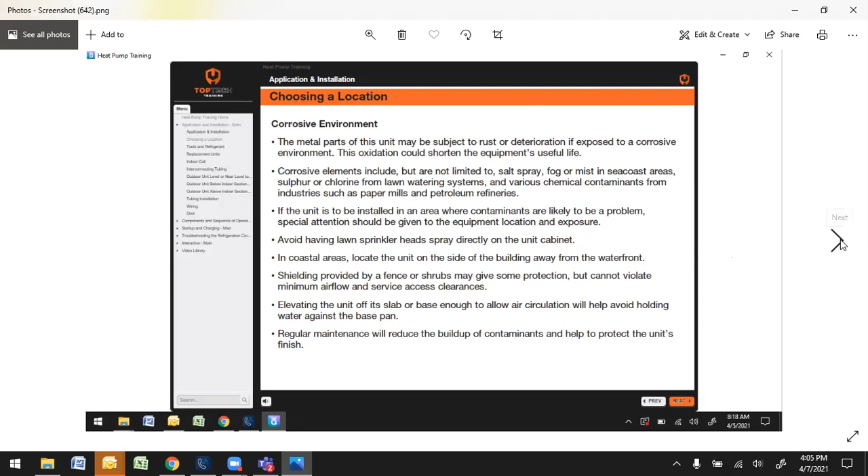So on the coast, that's something to worry about. Shielding provided by a fence or shrubs will give some protection, but you don't want to violate the minimum airflow or service access clearances. Some of that you have little control over—homeowners will put up fences or bushes. But if you can, let them know ahead of time: if they do block it off, it will have an effect on their system and its operation.

If you have a unit with space limitations, whether single or multiple unit applications—for a single unit, clearances below 6 inches will reduce unit capacity and efficiency. Do not reduce the 60 inches on the discharge, and from a service and installation aspect, keep a minimum of 24 inches. If you have multiple units, which is not uncommon with houses and buildings, when multiple condenser coils are aligned, a 6-inch clearance is recommended for 1.5 and 2-ton models, and a 9-inch clearance for 2.5 to 5-ton models. Combined clearances below the minimum will reduce capacity and efficiency.

Noise considerations—bear in mind this is a heat pump, so it does go through a defrost cycle. The Rheems have a kind of quiet shift compared to some other brands; it will stop and allow the compressor to relax, but there is still some noise associated with defrost. So try to keep the unit away from living, sleeping, or recreational areas. And to prevent noise transmission, the mounting pad for the outdoor unit should not be connected to the structure.

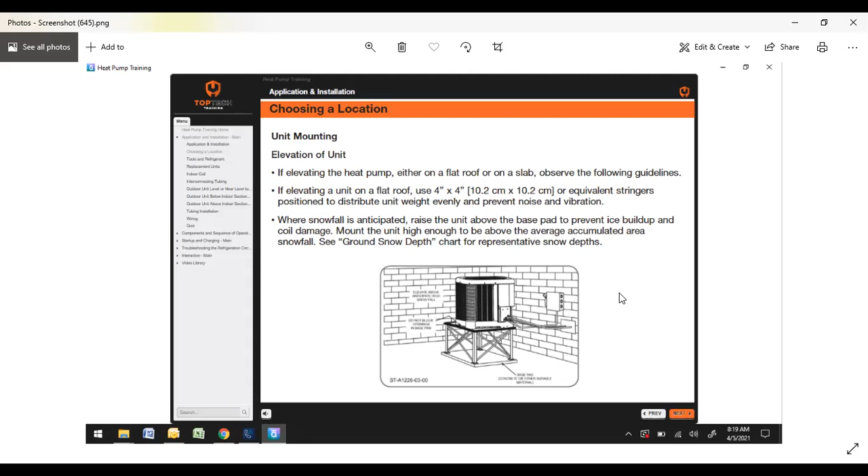So sometimes if you put them on the ground, they won't really be a problem. Other times I've seen them grow a whole ice fall up the side of the unit. So it just depends. But if you do raise it up, it's recommended - some guys use 3-inch pump ups, 6-inch pump ups, to get them up off the pad.

Some of the tools required for servicing 410A models. Years ago, when R22 was predominant and 410A was just starting out, everybody had to have 2 sets of gauges, which most people still do.

A lot of the gauge sets do multiple refrigerants now if you're dealing with different refrigerants. But you do have to have a manifold rated up to 800 PSIG on the high side, up to 250 PSIG on the low side, a 550 PSI low side retard, and manifold hoses with a service pressure rating of 800 PSIG.

That is important when you're dealing with high pressure refrigerant. If you have old worn out hoses or underrated hoses, they could explode. If you've ever had one explode, it's like a gunshot going off right next to your head. So it is important to check your hoses, check your seals, make sure that they're properly rated.

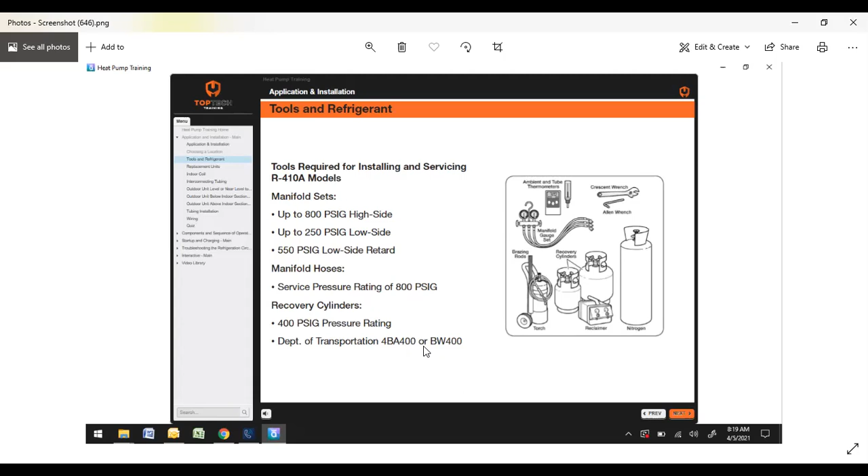Also make sure you have recovery cylinders of at least 400 PSIG and DOT ratings of a 4BA400 or a BW 400.

When you're dealing with direct replacement units, to prevent failure of a new unit, the existing line set must be correctly sized and cleaned or replaced. Care must be exercised that the expansion valve device is not plugged.

For new and replacement units, a liquid line dryer must be installed - it is supplied with each unit - and refrigerant tubing must be properly sized.

Recommend testing the old system for any kind of acid. If it is positive, a suction line dryer should be installed and removed after about 72 hours.

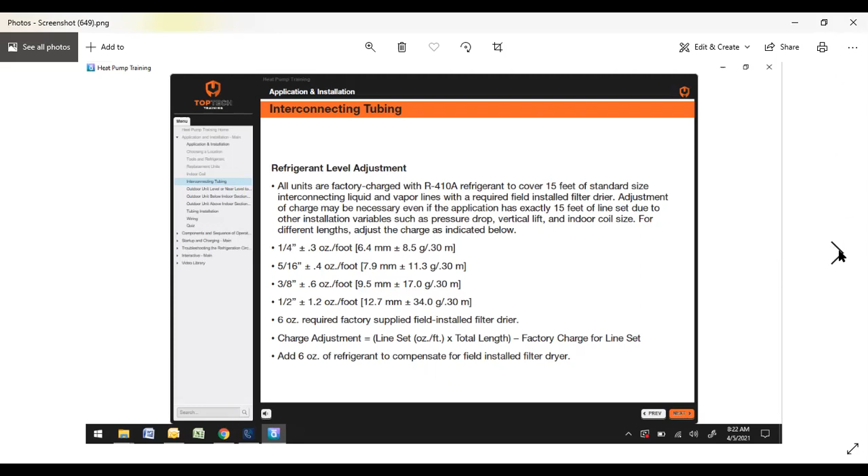And there again, a lot of this is just if you're going to do a gross charge. You don't want to take your gross charge, or the fact that it's 15 feet, as being okay. If it's a downflow situation, you may very well be overcharged at 15 feet out of the box. There again, it could be an upflow at 15 feet and you're still short. So this just gets you definitely within the ballpark, but it's not fine-tuned from there.

This goes over some of your interconnecting tubing and fitting losses, similar to your PVC elbows on 90% furnaces, giving you the different equivalent lengths. So like a 3/8, let's do 3/4 here - a 3/4, 90 degree, short elbow adds 1.9 feet to your equivalent length. If you do a long radius, it's 1.3. So by the time you start adding all your fittings in, along with your additional length, that gives you your total equivalent length.

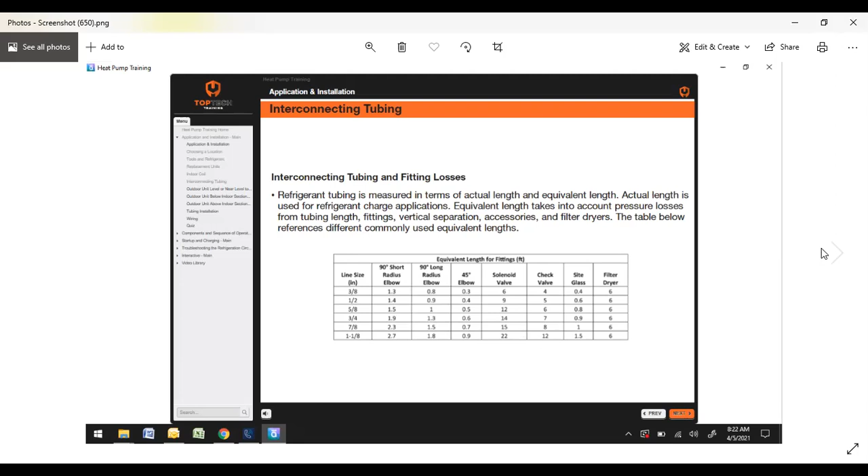Liquid line selection: the purpose of the liquid line is to transport warm, subcooled liquid refrigerant from the outdoor unit to the indoor unit. It is important not to allow the refrigerant to flash into superheated vapor prior to the expansion device. The flashing can occur for a couple of reasons: low refrigerant charge, improperly selected line size, absorption of heat prior to the expansion device, excessive vertical rise between the condenser and the evaporator. Also, if you have kinks in your liquid line, that can cause it to flash prematurely.

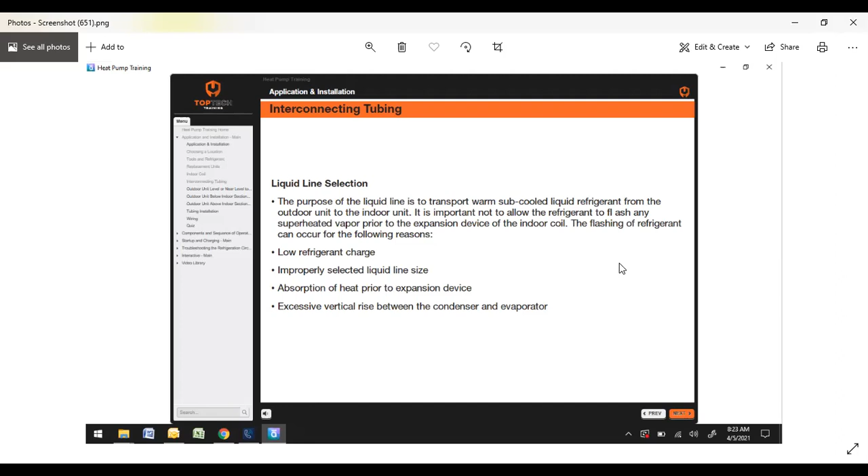Your suction line's purpose is to return the superheated vapor to the condensing unit from the evaporator. Proper suction line sizing is important because it plays an important role in returning oil to the compressor to prevent potential damage to the bearings, valves, and scroll sets. Also, an improperly sized suction line can dramatically reduce capacity and performance of the system. So there's lots of systems that are working and cooling, but they're not nearly as efficient as they should be, and that's not uncommon.

You can put the best, most efficient system in, but if you don't follow the proper guidelines for proper line set selection, you could have a 17 SEER system realistically, if you're lucky, getting 13 SEER.

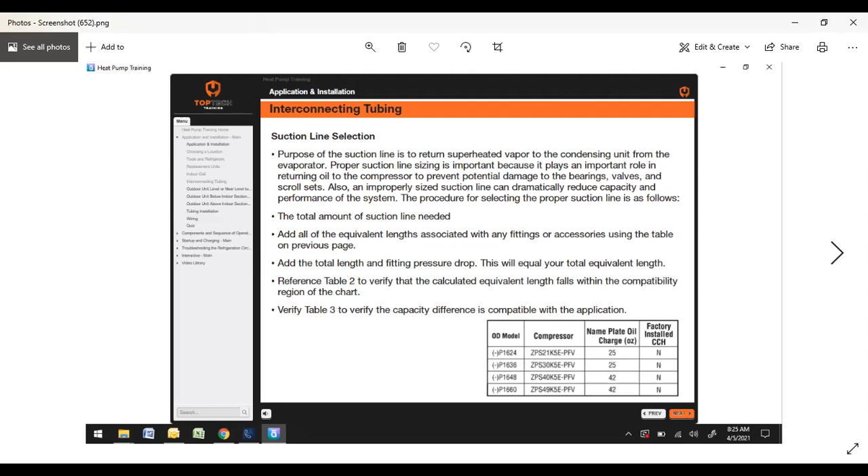And this is a big one too - long line set applications can require a considerable amount more refrigerant. The additional refrigerant needs to be managed through the entire ambient operating envelope that the system will go through during its entire life. Off-cycle migration is where the excess refrigerant condenses and migrates to the lowest part of the system. Excessive buildup of refrigerant at the compressor will result in poor reliability and noisy operation. So if you have a very long line or a very high lift, and it doesn't come with a crankcase heater installed, it'd be a good idea to keep a crankcase heater on it. That will keep the refrigerant boiled off in your compressor, which will make it easier for starting and prolonged operation.

Tubing installation: observe the following when installing correctly sized L-type refrigerant tubing. Check the tables for the correct line size. If at all possible, use the units as they come with specific lines already on them. If you stick to what's there, you're generally safe in most applications. So if you're putting a new line set in, you can check and see - do I have 3/4, 3/8, 3/4, 3/8, 7/8? If you match it up accordingly, that will keep the system running good for you.

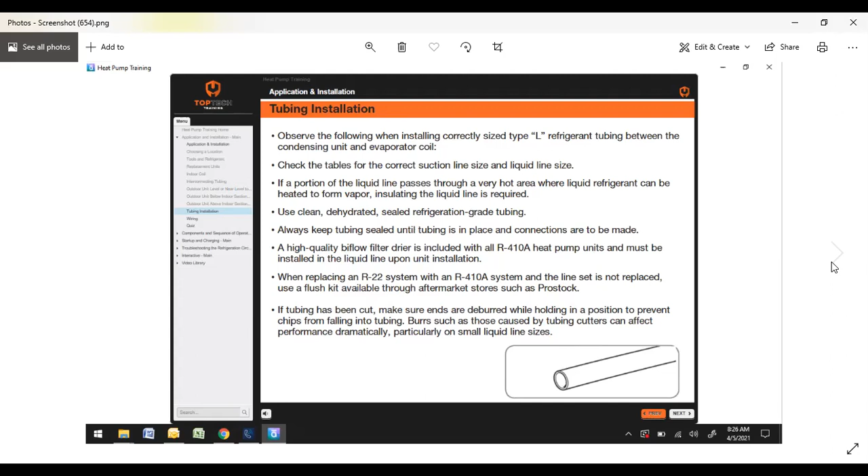For best operation, I came across this a long time ago: keep tubing as short as possible with a minimum number of elbows or bends. A lot of guys use a tubing cutter or tubing bender. Some people are really skilled at it and make it look perfectly mechanical. If you can use a bender and make it look nice and mechanical, that's even better. Each mechanical fitting you have to put in is one more joint with the possibility of leaking.

So if you can use a bender, outstanding. If the tubing is to be run underground, it must be run in a sealed watertight chase, such as PVC, something somewhat watertight. Use care in routing tubing, do not kink or twist. That's where a good tubing bender helps on the vapor line to prevent kinking. Bending 3/8 or anything below that's pretty easy. 5/8 is okay if you're good at it. 3/4 or 7/8, I'll always kink it no matter how hard I try. So use a tubing bender if you have one, just to prevent kinks.

Now here's a big one. Whenever you're mounting your lines, route the temporary hangers, straighten the tubing, install your permanent hangers. Lines must be adequately supported. If the vapor line comes in contact with walls, ceilings, or flooring, the vibration of the vapor line in heating mode will result in noise inside the structure.

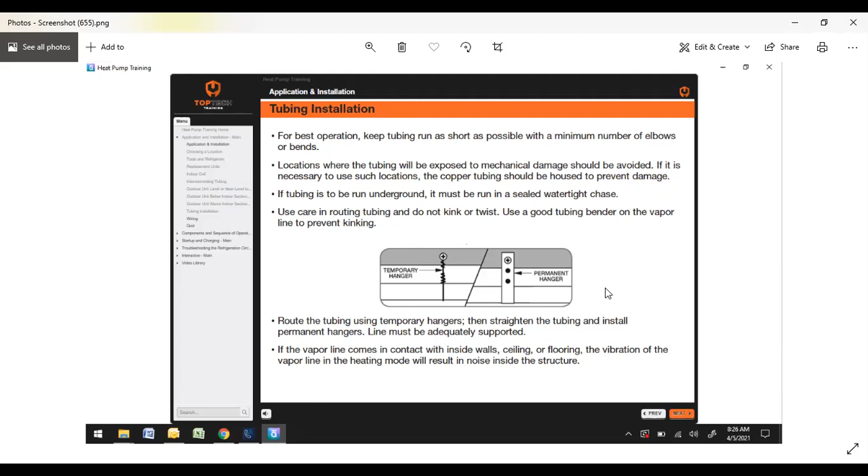I came across one time where they ran the refrigerant lines under the house. It had vibrated for so long against the water line that it actually fused itself to the water line. So whenever they turned the water on in the house, the same water would actually run through the outdoor unit and the evaporator coil. It did create a leak, obviously, but it also fused into the water line. So in that case, because they didn't take the proper steps to make sure everything was supported properly and not touching and kinking, it basically destroyed the system.

Make sure you blow out the liquid and vapor lines with dry nitrogen before connecting to the outdoor unit and coil. Any debris in the line will end up plugging the expansion device. TXVs tend to have enough problems on their own; we don't need to create more problems with additional debris that will get in there and end up plugging it up.

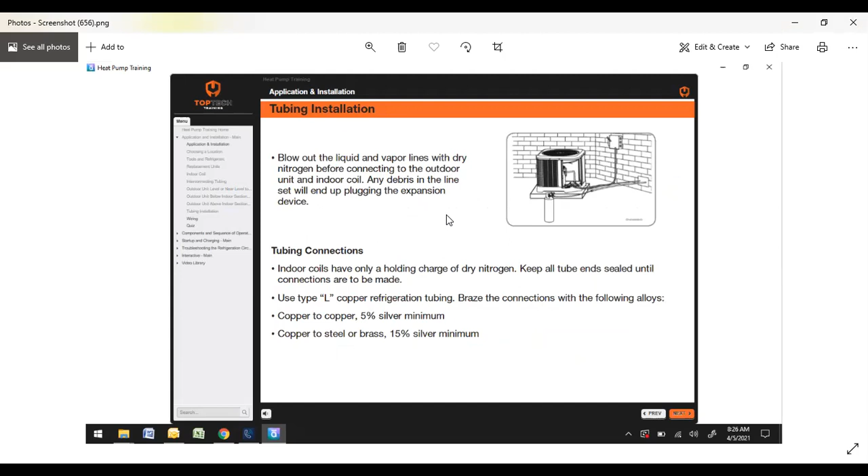Now there's different ways that you can attach to the line. Some guys use Pro Press. They even have shark bite fittings now that you can shark bite your refrigerant lines. I haven't used any yet. Most people braze them, so it is imperative that you purge with nitrogen as you're brazing, because as you're brazing, all that black scale, gray and black burnt carbon you see on the outside is also what you get on the inside, unless you purge with nitrogen.

Be sure both valves are shut off, then remove your service caps and cores to protect the seals. Once you've done that, be sure to wrap the valves. I'd do both: wrap the valves with a wet rag and also use a thermal barrier, whatever kind you like, the paste or the gel. The more you can protect these valves, the better.

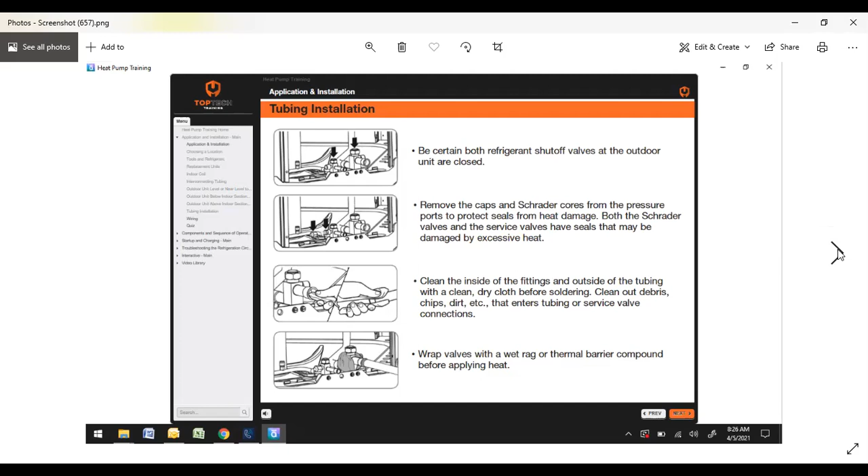If you overheat them, if you don't take the right precautions, they will leak. I've seen that a few times last summer. So take the extra 30 seconds, whatever it takes, to protect your valves. Five minutes spent on the installation could save you hours on callbacks.

Braze the tubing between the outdoor unit and the indoor coil. Flow dry nitrogen into the pressure port. After your brazing, use an appropriate heat sink to cool the joint, then reinstall your Schrader core into both pressure ports. Do not allow your vapor line and liquid line to be in contact with each other. That can cause undesirable heat transfer, resulting in capacity loss and increased power consumption.

Because all the new units we're selling today, everything's being sold on efficiency, let's face it. So if you're going to sell on efficiency, do everything you can to give them what they're paying for. Customers don't know any better, but if you do a really poor job and their new 16 SEER doesn't save them any more money than their old 12 SEER did, they're not going to see any benefit.

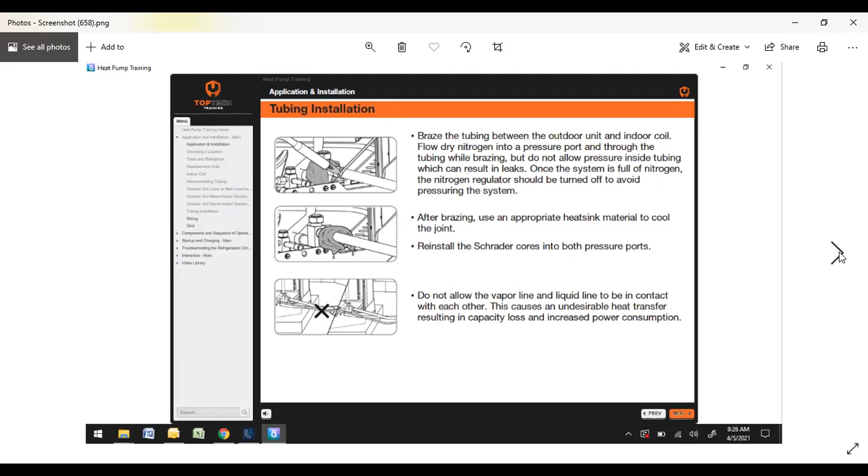Leak testing - this is huge. I still see guys braze their joints in, put a vacuum pump on it, and don't even bother to leak test it. The indoor coils do have a holding charge of dry nitrogen, so once you pop those out, you should get a small puff of nitrogen.

This is pressurized through the line set and coil through the service fittings. They're set at 150 psig maximum. I personally always test it higher than that if I'm just testing my line set and coil. Once you're pressure testing your compressor as well, you do want to keep that about 150. Pressure test that, let it sit for at least 15 minutes, and make sure it hasn't dropped. If it has dropped, use some soap bubbles to figure out where your leak is.

Then we'll get into the control wiring, low voltage wiring. It's 24 volt, needs a 40 VA minimum transformer. Most furnaces, circuits, and air handlers will be sufficient for that. Use 24 volt, 18 gauge wire. Don't use speaker wire or that really thin thermostat wire - it just doesn't work, it creates more trouble than it's worth.

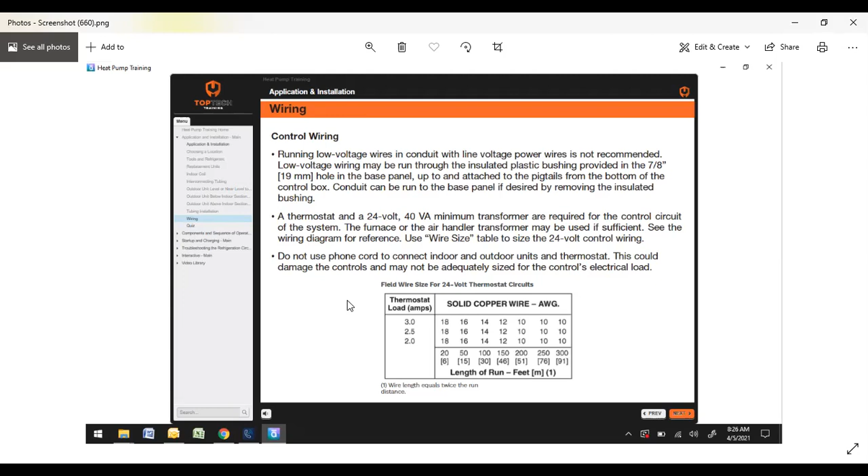Always run extra wires. If you're running an air conditioner, I ran at least a 4-wire if I needed a 2-wire, and I always ran an 8 if I needed a 4. That way down the road, if you need to switch a wire or two, wire is not horribly expensive. That could save you a lot of money down the road as well.

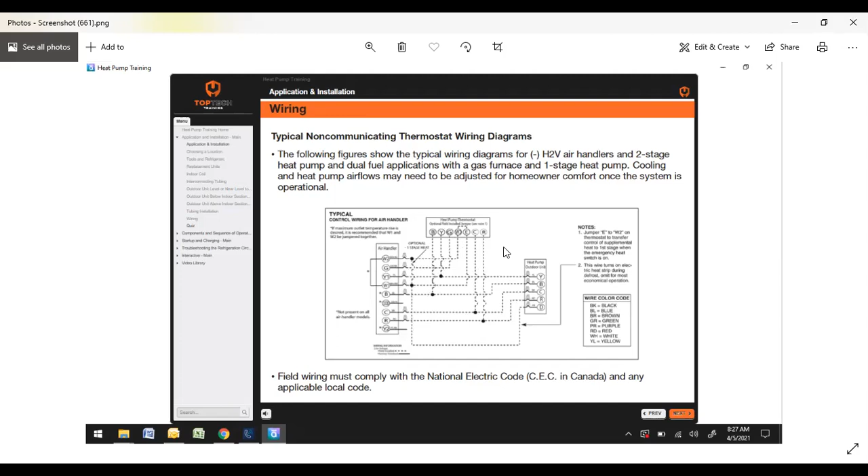Now the 14 SEER, 15 and 16 SEER 2-stage, all these are non-communicating units. They can be used with communicating furnaces with the EcoNet thermostat. So you have that option as well, but typically you're going to use either a single-stage heat pump stat with auxiliary heat, or 2-stage if you're doing a 2-stage heat pump, 2-stage air handler.

Your power wiring - it is important that proper electrical power from the commercial utility is available at the unit. Voltage ranges from a minimum of 187 to a max of 253. If you're down at 187 or even 190, your compressor's probably not going to start. And if you're up over 253, you're probably going to end up having compressor and fan motor damage. So you've got single phase 208-230, three phase 208-230, 460, and 575.

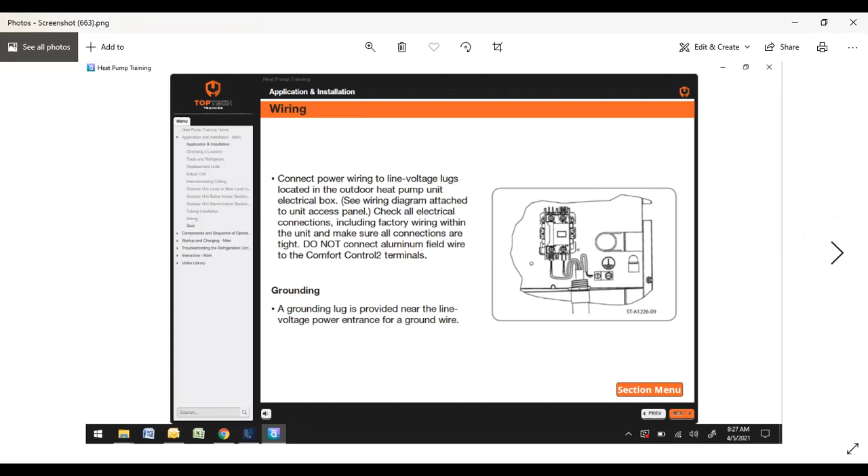Now, as you're looking at the units, this is a model number explanation or nomenclature. Your first letter, in this case Rheem, will be an R. Your second letter is going to be a P for heat pump. Your third, which will be 2 digits, is your SEER, so we're dealing with 14, 15, or 16 SEER. The next 2 digits are your tonnage, so we've got 18 through 60.

The next letter will be basically your design version. In this case, A, B, or F. We typically stock the F because we get better ratings out of the AHRI matches with the F model.

The next letter is going to be your voltage. Your J is the most common, that's single phase 208-230. We do have them in C voltage, 3 phase 208-230, and D, which is 3 phase 460.

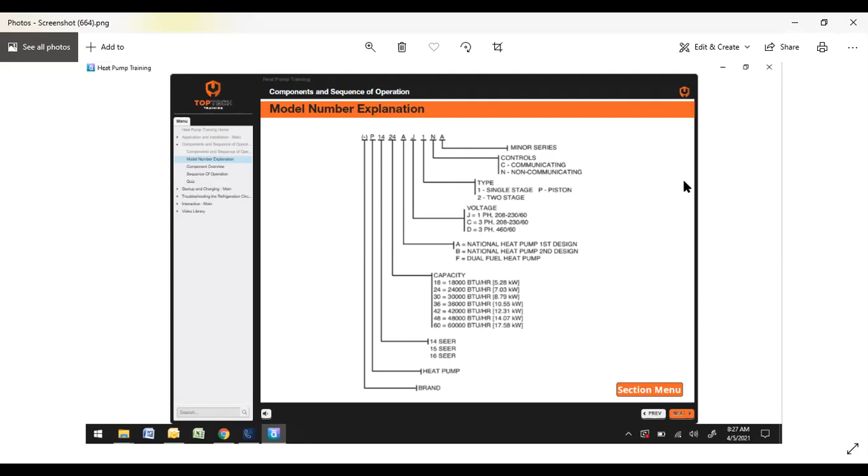Your next number, in this case 1, will be single stage. If you have a 2, it's going to be 2-stage. Your next letter is going to be an N, and these particular units are non-communicating. So you have the N, and then the A is your minor series. As they make revisions and improvements, that could go to a B, C, D, whatever minor series changes are made.

Component overview here. This is a picture of the 14 SEER heat pumps.

Downward view here, fan blade, and things I like about the Rheem. You can access these coils real simply with 1 or 3 screws, depending on the tonnage. They're all single row coils, easy to clean. There should be no reason these coils do not get cleaned and cleaned properly and thoroughly, because they're single row, you can see right through them. Down here, you've got easy access to your service valves, and you've got 2 nice little cups here on each side to put your service valve caps and the Schrader cores and such.

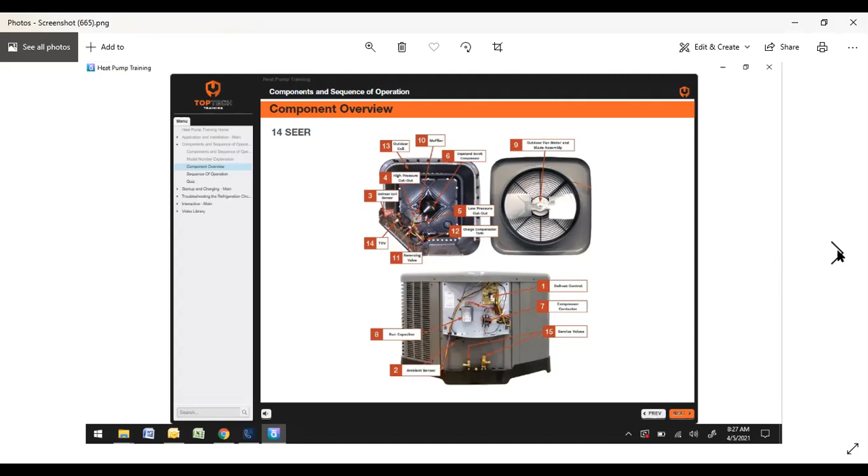To 16 SEER 2-stage unit, predominantly the same unit. We utilize the same defrost board. Compressor obviously is 2-stage.

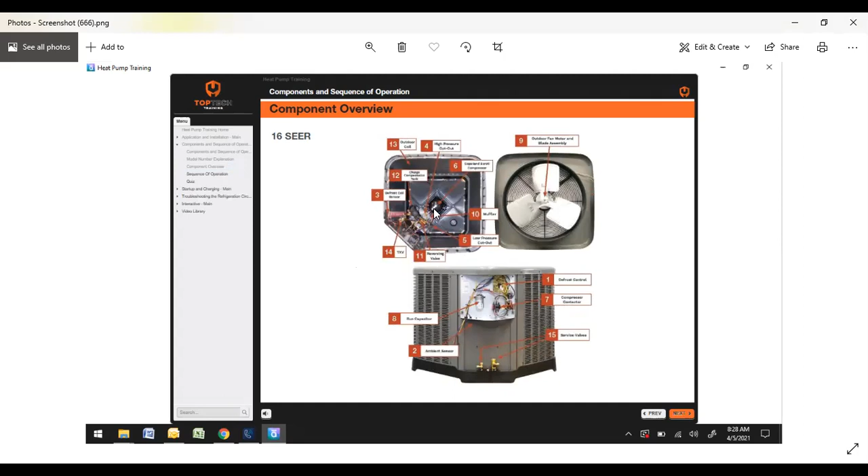You have your C, which obviously is your common, your R, which is your 24-volt hot, your Y, which is your compressor contactor, first stage of cooling, or first stage of heat.

You have your B terminal. So when you think B, in some brands B can be common, but with Rheem, think of O and B. Every thermostat you set up, you've got to say, is it an O or a B? B is your reversing valve, so it's going to engage in heating, which is opposite of the O. So your B is going to be your heat, and then your D will be your auxiliary heat.

So once you go into defrost, you're going to immediately get a signal in your D wire, which is going to turn on your auxiliary heat.

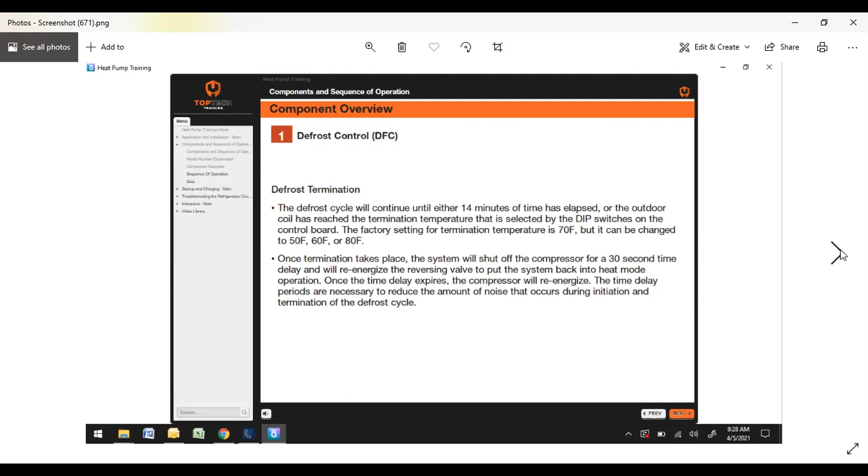Your test pins - so your test mode pins have three very useful functions. Nobody likes to wait time delays. It's a pain to wait 5 minutes. So if you're in a time delay on the outdoor unit, all you got to do is short your test pins out, and it will immediately kick in your unit. That works for both heating and cooling, so there's no sense in waiting the 5 minutes out.

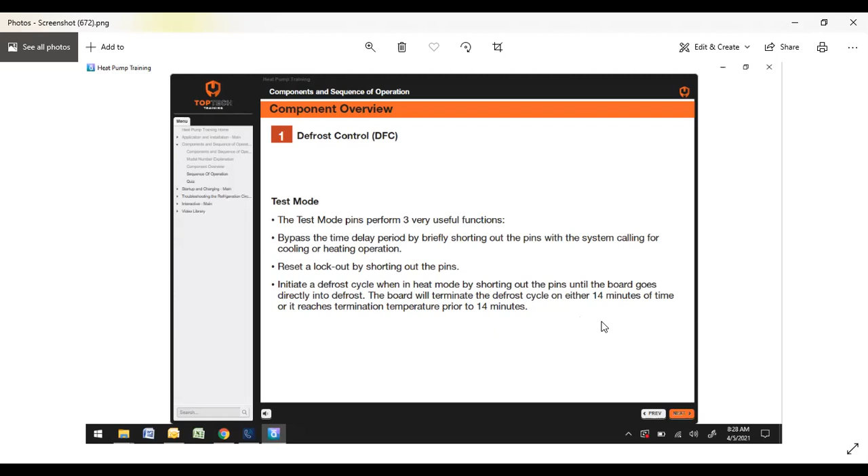If you come up on a unit that's been locked out due to high pressure or low pressure, the only way to reset that lockout is to break your 24 volts to the outdoor unit, or you can short the test pins and that'll reset your lockout. You can also initiate a defrost anytime it's in heat mode. So like I say, that can be a quick 30-second defrost, or it can be whatever it needs to be.

Let's see here, okay, now we get into the defrost sensors. The defrost sensors - they're both 10K ohm resistors. One sensing your outdoor ambient, the other one sensing your coil temperature.

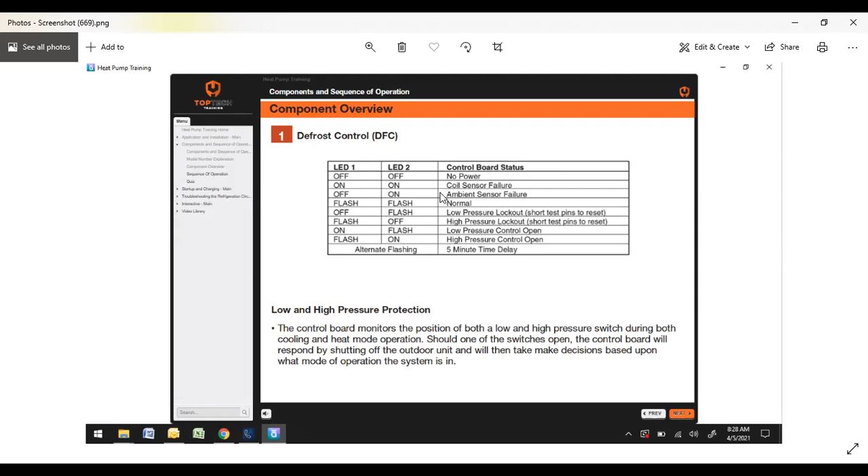We had some issues not too long ago with some sensors where they weren't reading correctly for whatever reason. If an ambient sensor fails completely, it's supposed to initiate a defrost every 34 minutes. But if you lost a coil sensor completely and it recognizes that, it will give you a code. If you lose an ambient sensor failure completely, it'll give you a code.

It may not be a complete failure, it just may not be sensing the correct resistance. So if your sensors are out of calibration, the system will not perform a proper defrost or may not enter a defrost. These are negative coefficient 10K ohm resistors.

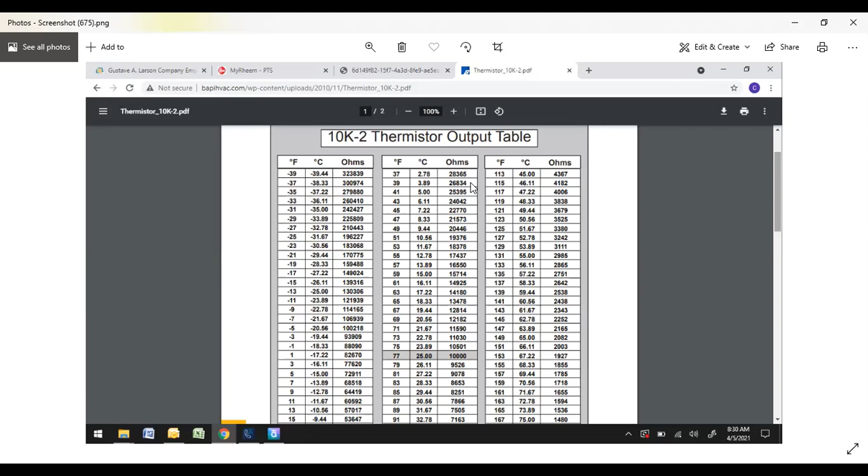If both sensors are calibrated properly, your sensors are fine.

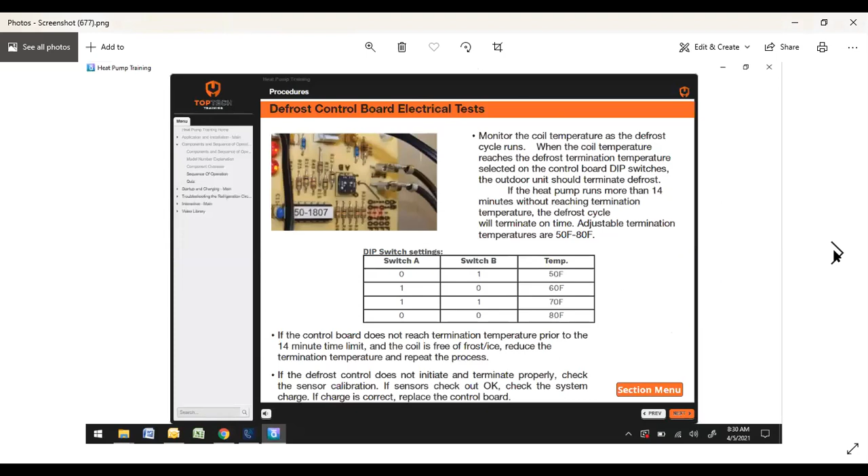Your ambient sensor is actually mounted just below your electrical panel right here. Right here is their little chart. So we'll say 32 degrees on this one, we should have had 32,650. That's what we're looking for if you're doing an ice water test.

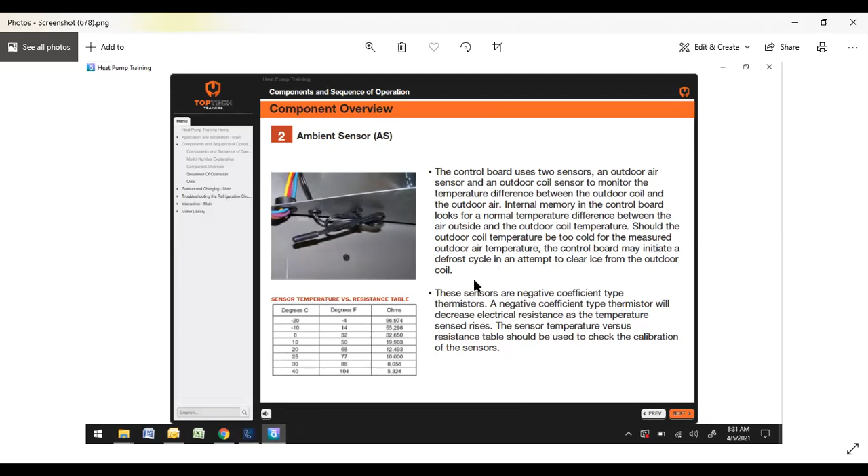The defrost coil sensor is really hidden. You won't typically see the wiring because of the way it's secured so the fan doesn't hit it. But if you're looking at the electrical compartment, or if you take the top off the unit, it'll be to your left side at the very top of this coil right here. This line here is too small for the bracket, this line here is too small, this line here would work, but they want you to put that at the very top bracket right here.

The voltage output from the control board to the sensors is 4.5 to 5 volts DC. So if you have a completely failed or shorted sensor, it would recognize that, but it cannot recognize if the sensor is not calibrated properly. That's where sometimes you have to calibrate it or make sure that they are calibrated.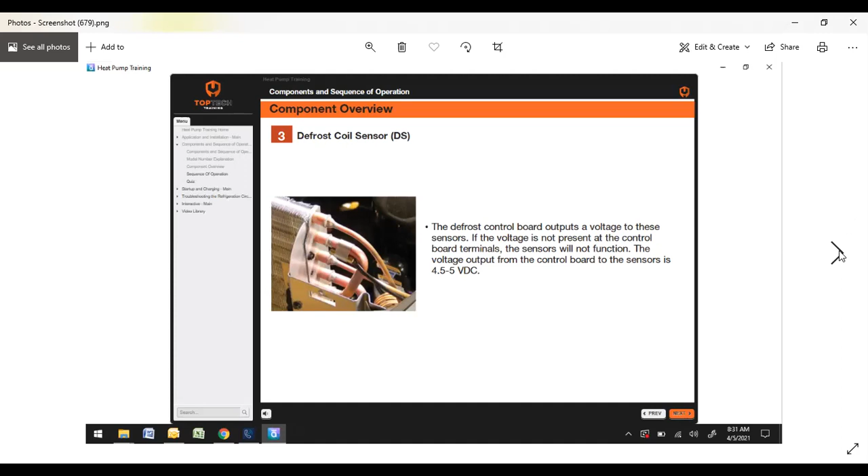These also have high pressure cutouts. It's an auto reset that opens at 610 psig, and closes at approximately 420 psig. So if you're hitting 610 pounds, obviously there's a restriction somewhere. If this control opens 3 times within a call for heating or cooling, then you will get a lockout, and it will remain locked out until either the 24 volts to the unit is disrupted, or until you hit the test pins.

Some common causes of high pressure switch lockout include overcharged systems, inoperable fan motor, dirty outdoor coil. It's not uncommon, for instance, if you put a downflow system in - because we'll get into the charging charts, they are different on heat pumps between upflow and downflow - if you put a downflow heat pump in and it's 10 feet from the outdoor unit to the air handler, there's a real good chance it's going to be overcharged out of the gate. So if you actually start the unit and watch it, you'll see your head pressure start to climb.

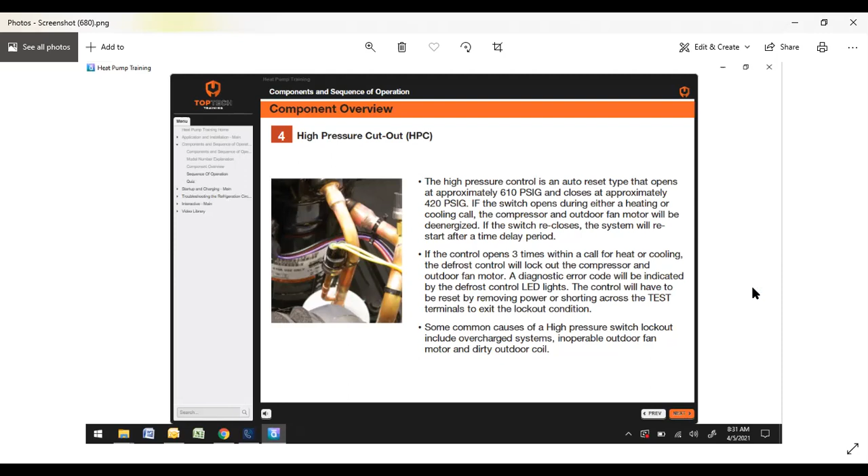Get your low pressure cutout. Your low pressure is an auto reset as well. It opens up at 15 psig and recloses at 40.

The control board will respond differently depending on whether it's heating or cooling. Cooling mode: if the switch opens during cooling, the outdoor unit will stop - compressor and the outdoor fan motor. If the control resets, the system will restart after a long time delay period. There again, if you get the same 3 trips in a call for cooling, it's going to lock it out.

In heating mode, if the low pressure control opens during a call for heating, the outdoor unit compressor and fan motor shuts off, and when the switch resets, the system will enter a time delay and then restart. There again, it will also lock out after 3 times, which will be real evident in heating season - both cooling and heating. In heating season, if it locks out during a period of time, their electric bill is going to go up substantially.

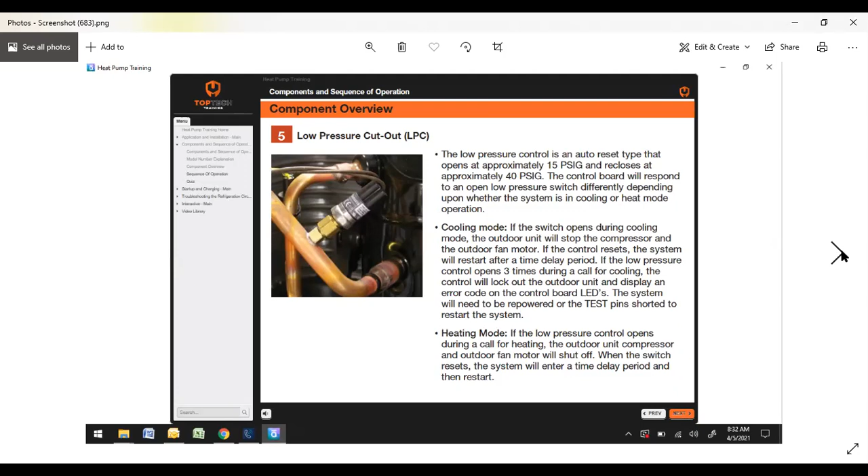The Copeland ZP compressors, scroll compressors that are in all these units, are designed to deliver a 2 to 4% increase of efficiency over the prior generations. There are 3 single and 3-phase configurations. You have 3 windings: your run, which is your red, your start, which is your purple,

and your common, which is your black. Your orange wire connects the run wiring to the common terminal and capacitor. If you cross these up, if you're replacing a new compressor, or somebody's been messing with it, or if it's not wired right from the factory, hypothetically, you will get what appears to be a lock rotor situation.

It'll try to start, it'll drop out. So if you ever come across that, put a new compressor in, first thing you want to do is double check everything, double check your wiring. Make sure your red's going to your run, your purple's going to your start, your black's going to your common. Make sure that's the way it is at the compressor, and also at the contactor. And then make sure your orange wire is connected to the appropriate terminal on the run capacitor. We get that quite a few times a year.

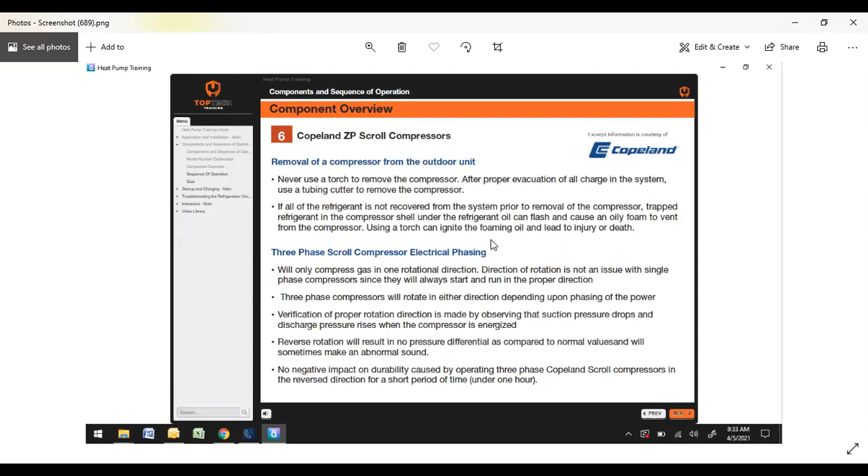Startup or replacement of a new or replacement compressor. When charging a system with a scroll compressor, charge liquid into the high side only. It's not a good practice to dump liquid from a refrigerant cylinder into the crankcase of a stationary compressor. If additional charge is required, charge liquid to the low side of the compressor when the compressor is operating.

Do not start a compressor while in a deep vacuum. Internal arcing could occur. And do not operate compressor without enough charge to maintain at least 55 psig. A little further here, do not operate with a restricted suction or liquid line. Do not operate with a low pressure cutout disabled. Allowing suction pressure to drop below 55 for more than a few seconds could, over time, overheat the scrolls and cause early drive bearing damage.

Your 16 SEER models use two-stage compressors. These compressors have an internal low voltage unloading solenoid that will control the hot gas bypass ports inside the scroll assembly. When operating in low stage, the bypass ports open to reduce the compressor capacity to approximately 67%.

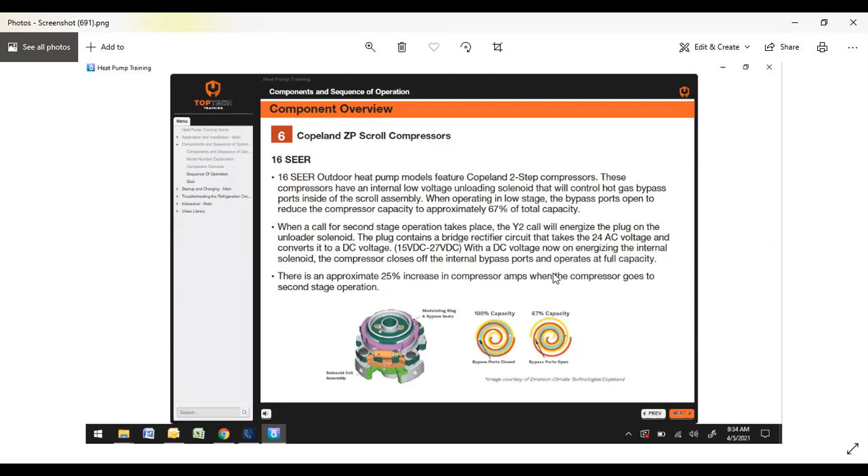There's an approximate 25% increase in compressor amps when the compressor goes to second stage. Usually you can hear it kick in. You should also see your pressures on your gauges change. Also your amp draw would change as well. That's important to understand.

Here's the nitrogen pressure testing safety limit. Suction line dumps the refrigerant suction gas directly into the shell of the compressor. The suction gas acts as a coolant for the compressor motor. The most pressure the compressor shell will be exposed to is the suction line pressure or the pressure during off-cycle equalization.

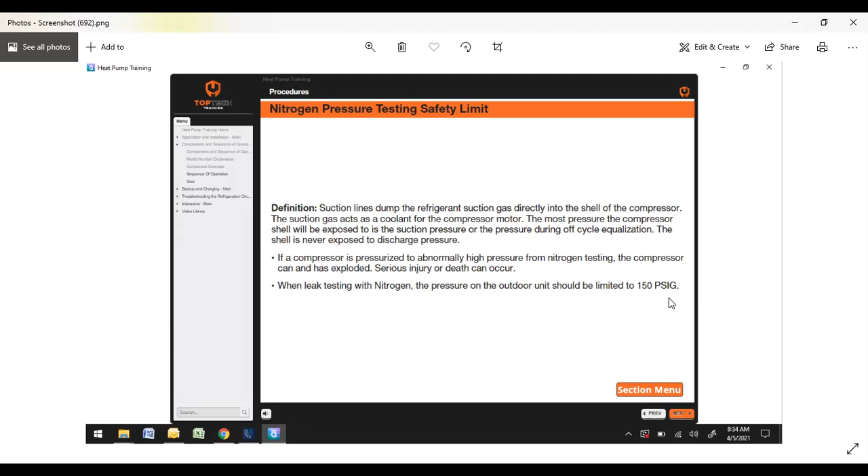If the compressor is pressurized to abnormally high pressure from nitrogen testing, the compressor can, apparently it's happened, has exploded. They can explode, and obviously serious injury or death could occur. So if you're taking your compressor into the equation, when leak testing with nitrogen, the pressure on the outdoor unit should be limited to 150 psig.

Some of the pumping problems here. There are many misunderstood facts regarding compressor pressures. High suction pressure and low condensing or head pressure, that will achieve peak performance. As the suction pressure drops and the condensing pressure, head pressure rises, your actual system capacity goes down.

Scroll compressors do not have valves. There is no valve test as with the reciprocating. When you first start a scroll compressor, the suction pressure should fall and the condensing or head pressure should rise. If this happens, you know the compressor is pumping.

If a compressor is operating with an excessive vibration, metallic sounding operation, or higher than normal amp draw, your compressor may have internal damage.

That's usually not very hard to hear. I'm sure most of you guys have heard a noisy scroll. If the scroll plate breaks, it will make a heck of a racket. So if you hear that, you don't let it run too long. Just turn it down and resolve the issue.

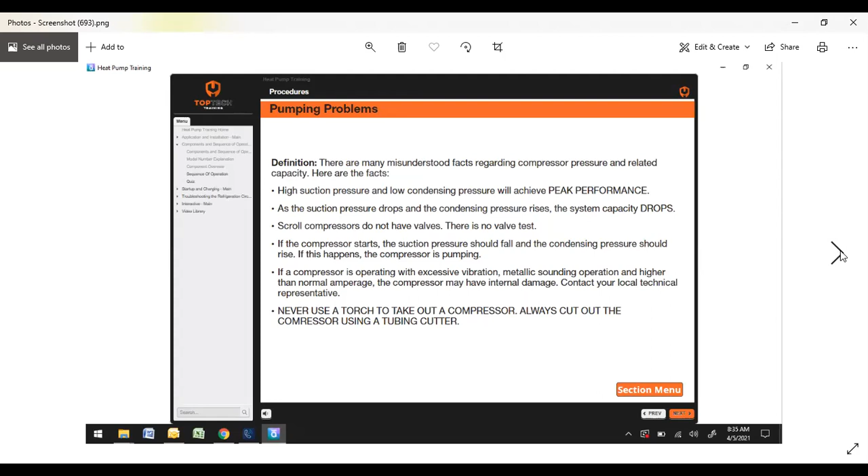A lot of the units will come with a crankcase heater already installed. Most installations will require the installation to prevent excessive liquid buildup or migration in the off-cycle periods. Generally speaking, starting kits are usually not needed because the scroll compressors always start unloaded, so even when the pressures are not balanced, they'll still start unloaded.

Those of you guys that have Meg-ohm testers, Megger testing of a scroll compressor can result in an invalid reading due to the position of your scroll compressor in the motor oil. They have those little, I won't say who, but there's a brand that makes them, it's got a little chart, good or bad, on your Meg-ohm reader. If you line up 10 brand new scrolls, I guarantee you at least 9 of them will show as being defective. So Meg-ohm testing of a scroll compressor doesn't give you a real good reading because of the position of the scroll compressor in the motor oil.

Center bearing wear at the bottom of the compressor can be excessive when liquid floodback or liquid flooding starting occurs. The bearing wear can lead to rotor drag on the windings and also to a direct short. So if you ever have an opportunity to see one cut open, you can see where the oil line should be and where, in a flooded compressor or a severely overcharged unit, you can see where the oil line is and you can see the damage that begins to occur.

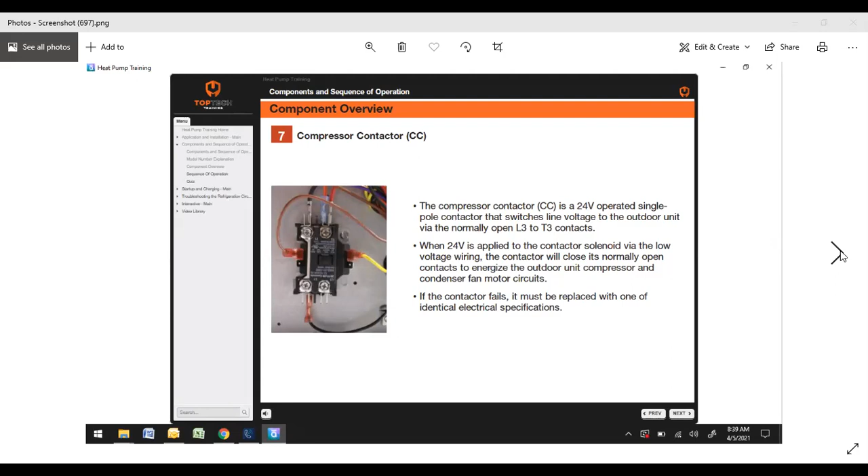You'll have your run capacitor. Your single speed models will feature dual run capacitors that serve the compressor and the outdoor fan motors. The 2-speed models will use an ECM outdoor fan motor. So the run capacitor in these models will be a single type dedicated just to the compressor circuit.

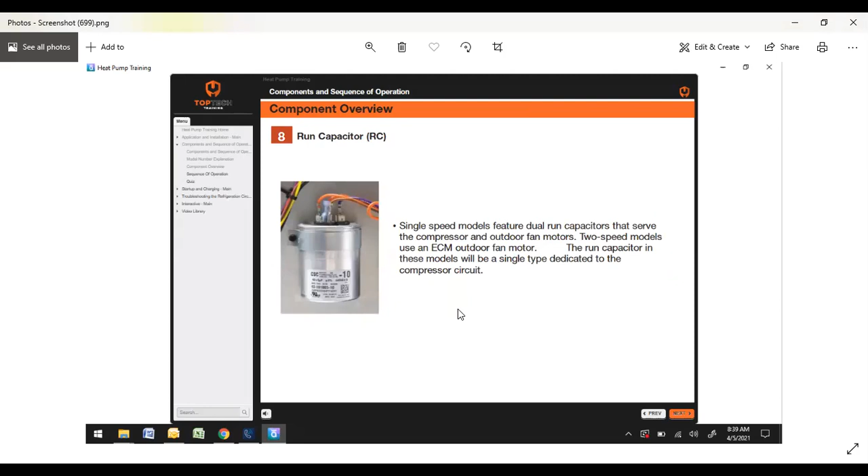You have your outdoor fan motor and fan blade assembly. The 14 SEER and 15 SEER are going to have a PSC outdoor fan motor, so that's 1 speed for both cooling and heating. The motor is connected to the dual run capacitor at the capacitor labeled fan.

The motor is energized by the defrost control board terminals labeled fan. So you'll have two fan terminals on your defrost board. One wire is always hot coming off your contactor, and then that is made or broken by the defrost cycle. So if it's in normal operation, that's going to be a hot terminal. If you go into defrost, it will disable that fan terminal.

And that's another good one too. Had a guy call the other day. His outdoor fan wouldn't come on, so he was checking. He thought it was a bad motor. We got to talking, walked him through it. Now he checked basically that he had 240 between the common and the hot fan terminal. When he switched over to the other fan terminal, he did not have 240, so therefore his motor was not being engaged. So ultimately, the motor was fine, and the defrost board was the faulty component.

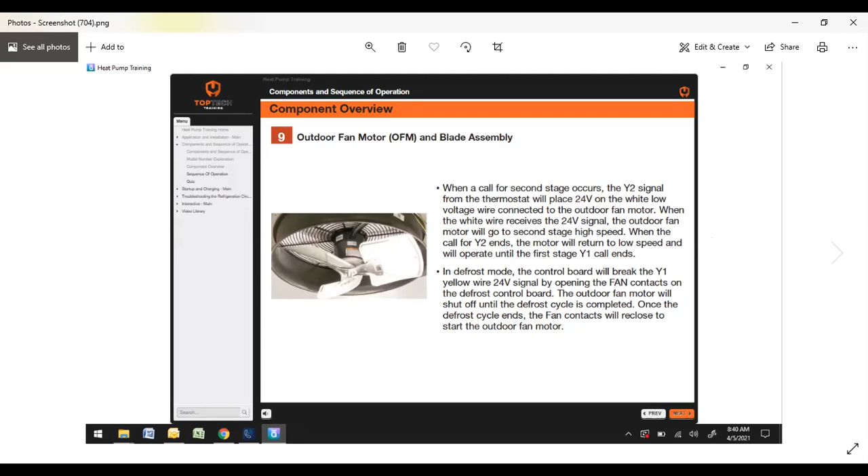And you'll also see what looks to be a filter dryer on the inside of these units. It's actually a muffler. Compressor mufflers are used to reduce both low and high frequency gas pulsations. The mufflers are mounted on the discharge line at the outlet of the compressor prior to the reversing valves. Mufflers should be changed or flushed if a compressor burnout has occurred.

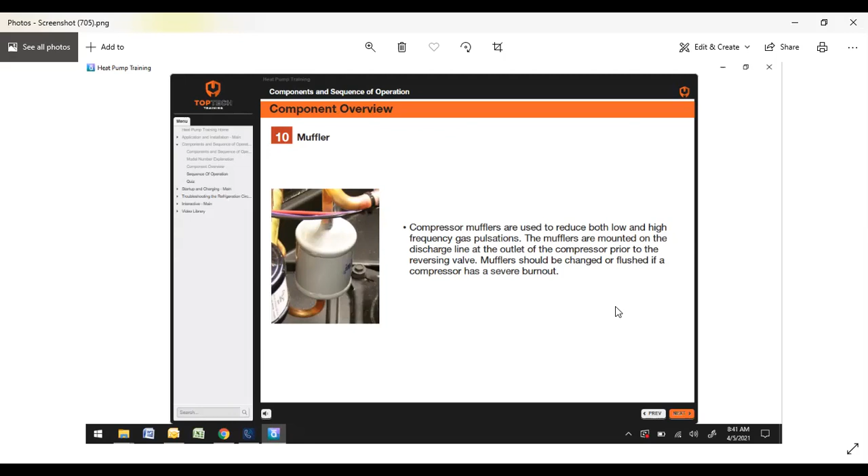If you ever look inside of a unit, you'll see all units are different, but you'll see the piping, how it kind of goes through different turns. It's never like a direct path. The reason for the different turns and the lengths, in this case here, the muffler as well, is to reduce frequency noises. If you ran straight piping to the closest direct lines, these units would get loud, much louder. The frequency gas pulsations would be, in some cases, pretty severe. So that's one reason why the muffler's there. It's basically a hollowed out filter dryer, more or less, but it's used to reduce sound.

You also have your reversing valve. Now here's where it kind of gets good. So your reversing valve is a 24 volt operated valve that directs the changes of direction of the refrigerant flow. In cooling mode, that valve will direct hot gas to the outdoor coil. In heating mode, the valve will direct hot gas to the indoor coil.

So you have 4 piping connections. The bottom or single pipe is always the hot gas discharge from the compressor. The middle tube on top is always the suction gas connection to the compressor. The left-hand connection, in this case, goes to the outdoor coil, and the right-hand piping goes to the indoor coil. That reversing valve will direct the discharge gas either to the left or to the right. So depending on what brand you're working on, that could be reversed. Some of them I've seen upside down.

But energized by the low voltage B wire, in heating mode the B wire will place 24 volts on the solenoid to direct the gas to the indoor coil. In cooling mode, that solenoid is not energized, and it will direct the hot gas to the outdoor coil.

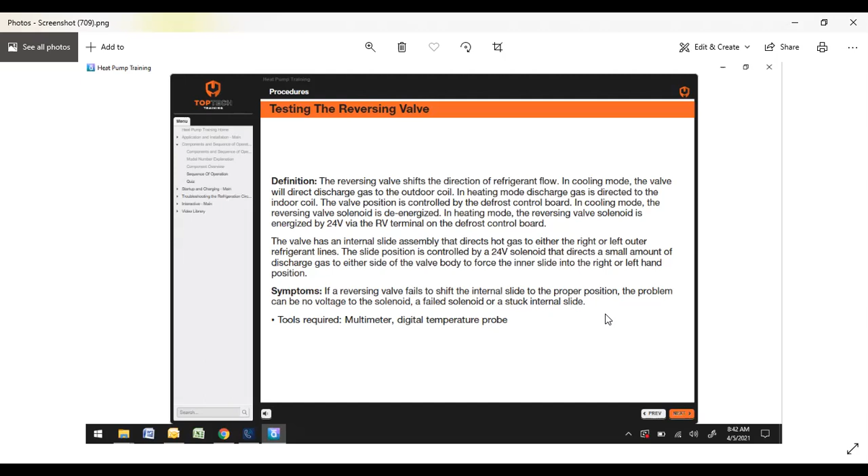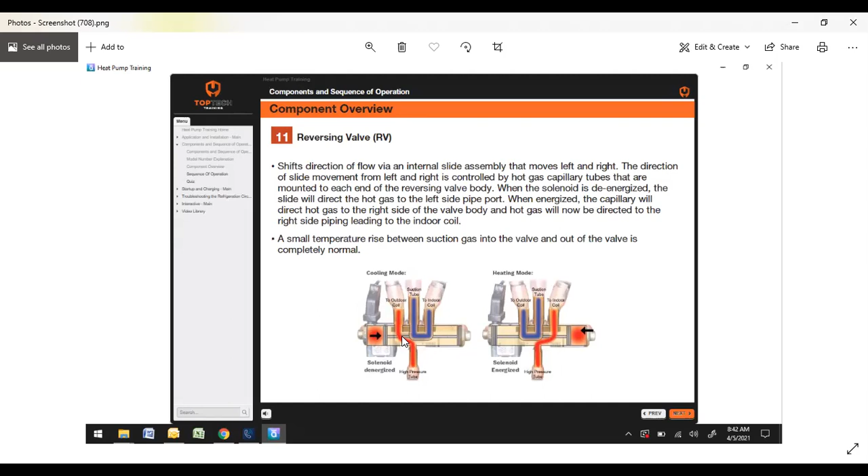You can also prove this - I got some of them on Amazon, little tiny rare earth neodymium magnets. If you put that on a reversing valve, you can actually watch the slide. Now, you'll see how large the reversing valve is, but the slide is nowhere near that big. The slide is actually pretty small. So if you take your magnet, you can find each edge of your slide with the magnet. And if you put it on there, you can actually watch it move back and forth, if it's engaging and sliding properly.

So if you're going to test the reversing valve, check for 24 volts between RV and C. If there's no voltage present, replace the defrost board. If the voltage is present, go to the next step.

Remove power to the outdoor unit, disconnect the two wires from the RV and C terminals, and check the resistance of your solenoid. Resistance should be measured.

If infinite resistance is measured, the solenoid is open. Replace the defective solenoid. If the solenoid checks out good but the valve will not shift, the reversing valve may be defective. Also make sure there is sufficient refrigerant in the system, and that you have a working compressor.

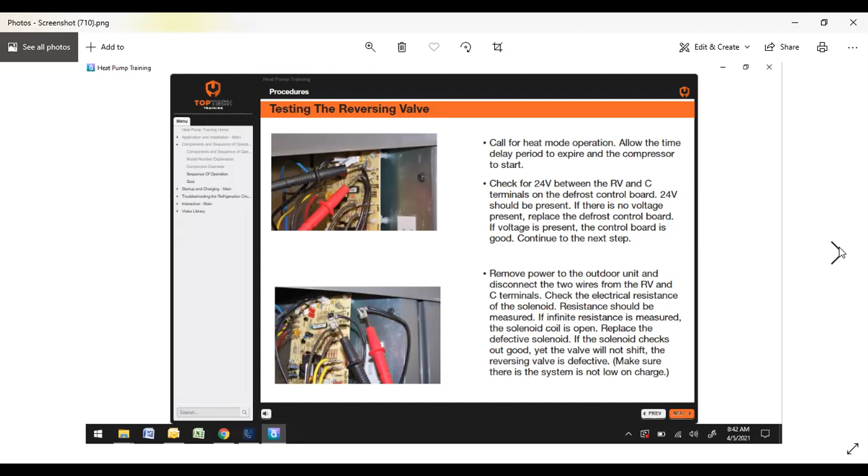So if you're questioning shifting problems, I had one guy, not last summer, the summer before last, actually cut the valve out and cut it in half just so we could get a good look at it. There was so much gunk and nasty stuff inside that even when you cut that open, you really couldn't hardly get it to slide back and forth.

So you can get stuff in there that will lodge them one place or the other. Usually you won't run into too many of these, but they can be a problem to check. But it's easy enough to check.

So as you're checking here, you'll have your 4 lines. In this case, you run the system in cooling or heating. Locate the common suction line that runs from the reversing valve to the compressor. So that's going to be your middle line here.

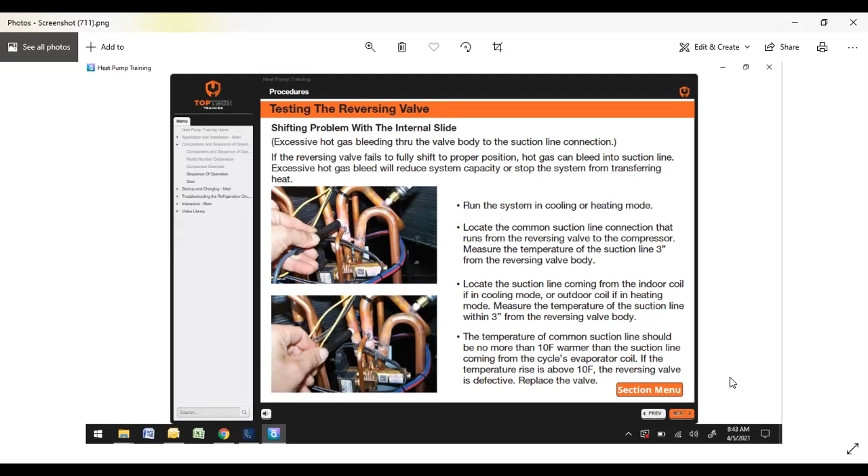The temperature of the common suction should be no more than 10 degrees warmer than the suction line coming from the cycle's evaporator coil. If the temperature is above 10 degrees Fahrenheit, the reversing valve is defective, because you should have two distinct temperatures. Your discharge, the single pipe at the bottom, will be hot. One of these, either left or right, should be equally as hot within a degree or so. Your center will be cool or hot, and the other one should almost match what that one is. If you have wildly different temperatures on all four, you're probably bleeding through. They're saying 10 degrees between these two here, or in the different reverse cycle, these two here. If you have that, replace that valve.

You also have, in some of these models, what looks like another filter dryer. It's called a charge compensator tank - a refrigerant storage tank used in heat pump systems to compensate for charge imbalances between heating and cooling. You'll have 2 vapor lines and 1 liquid line. The tank is brazed into the vapor line and connected via a T to the liquid line. When the heat pump is operating, the tank is at the same temperature as the vapor line. In cooling mode, the vapor line acts as a suction line and the tank is cold. In heating mode, the tank will be hot. So the gray one here is a muffler, and this one here is your charge compensator tank.

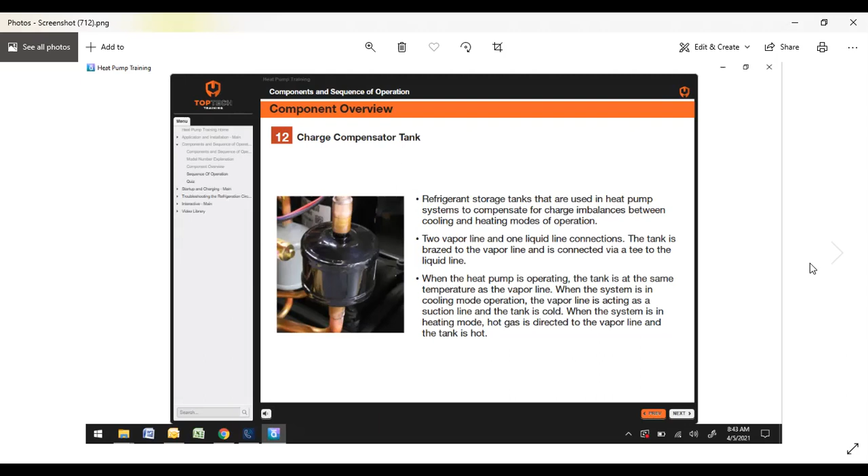You have your outdoor coil - copper tube and aluminum fin. The coils feature parallel hot gas circuits that feed into a subcooling loop. Hot gas enters the condenser coil, distributes equally to parallel circuits, is reduced to condensing temperatures, and the refrigerant condenses to a mixture of liquid and gas. The liquid and vapor mixture then travels through the subcooling loop, where the refrigerant is cooled below the condensing temperature and enters a liquid state. The refrigerant leaves subcooled approximately 10 degrees.

One nice feature about these coils is they are single row coils - easy to access, easy to clean. My coil at my house is a double row coil, a very efficient system, but every time I want a real good clean I have to get in there and separate the coils, which is a pain. So with nice single row, easy to access coils, there's never really any excuse for them to be dirty or unserviced properly.

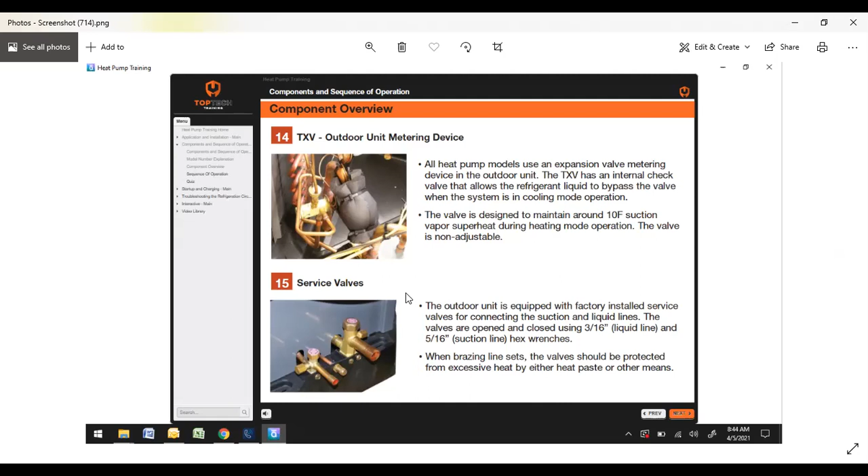When brazing line sets, the valve should be protected - I can't stress that enough. Years ago I had one of my service or install guys, and magically all his units had leaky service valves when he'd do installations. Mine never had leaks, but then again I took the time to wrap them. I was out there one day and actually saw what he was doing - that's why he had leaky valves all the time. He didn't take the time; he figured he could braze it quick enough and didn't need to wrap them. But that's not the case. Make sure you wet rag them, and then use some kind of cooling gel.

So a few issues with your outdoor TXVs. Every year this is going to pop up hot and heavy here shortly since it's getting warm. The outdoor unit's expansion valve.

If there's a problem with the valve, it is generally going to be related to the internal check valve or the valve's ability to properly meter refrigerant. If you get something stuck in there, if your sensing bulb loses charge, different things, it can be slammed shut. Your internal check valve could be stuck, could be blocked.

So internal check valve problems in cooling mode: liquid refrigerant exits the outdoor coil and enters the expansion valve. The liquid should exit the valve without any pressure drop, so there should be almost no pressure drop across that internal TXV because it's bypassing. If it is restricted, the liquid would experience a pressure drop across that valve. The pressure drop will cause a drop in temperature of the refrigerant as it exits the valve.

So a lot of times if that happens, by the time it does get to the indoor TXV, it's already started to meter, and therefore it won't cool properly. In heating mode, a stuck open check valve would allow refrigerant to bypass the metering device and enter the coil unmetered. The system's pressures would be high on the suction and low on the high side. So that could also be a symptom of a bad or a stuck reversing valve.

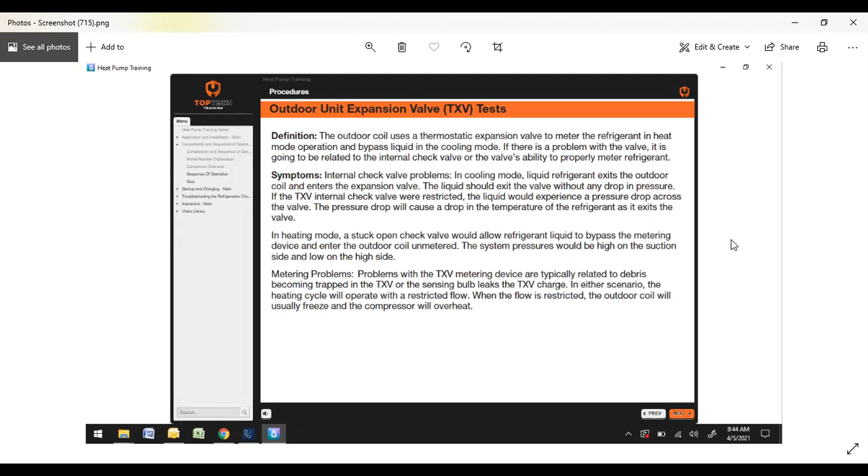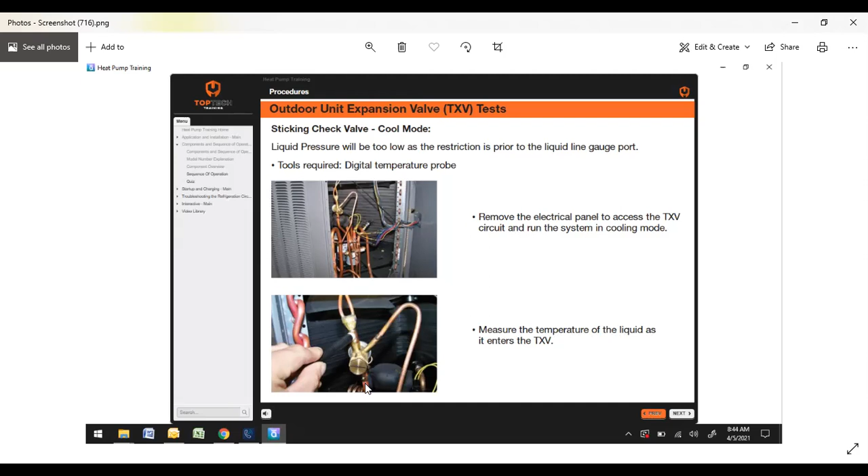So if you're going to check, this shows how to check your TXV. You have some kind of - they're using a touch probe here, but you can also use a pipe clamp. So you're basically going to check on one side. In this case here, you're going to measure the temperature of the liquid as it enters the TXV, and it should also be the same on the outlet side there.

So if you're checking at the top, the outlet, and then the inlet, there should be no difference in the two as it passes through the TXV. If you do see a major difference there, then you know there's an issue with the bypass.

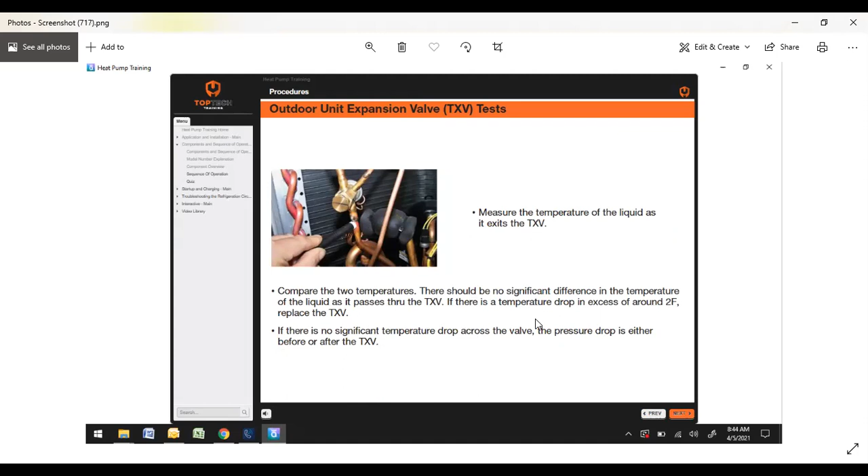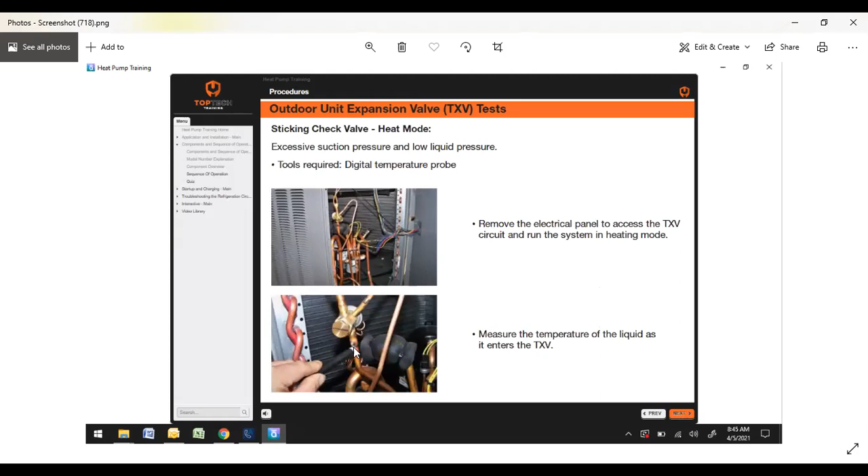Same with heat mode. If you're checking here, your inlet, and if you're checking your outlet, you compare the two temperatures - there should be a significant difference as it passes through the TXV. The temperature of the tubing leaving the expansion valve should be much colder than the outdoor temperature. If the temperature of the tubing leaving the TXV is warmer or equal to the outdoor temperature, the compressor, reversing valve are functioning properly - replace the TXV.

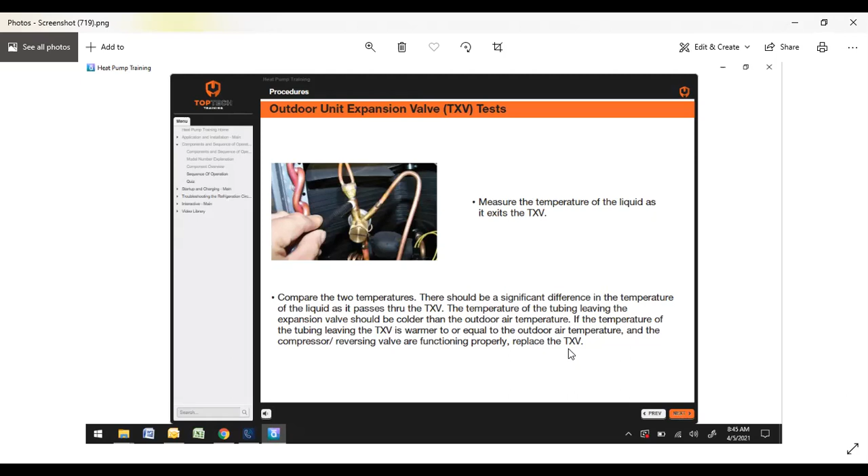So also your TXV tests, you can do what I call exercising the TXV. You can use hot water or cold water to open and close your TXV. So in this case here, you're going to run it in heating mode, measure the suction pressure, and calculate the vapor superheat - should be around 10.

So with the unit running, remove the TXV bulb from the suction line and place it in a glass of ice water. At that point, your suction pressure should drop dramatically and your suction vapor superheat should rise. If that valve does not respond with pressure and superheat change, replace the TXV.

And you can do the same thing if you put it in hot water. So if you put it in hot water, then cold water and back, I call it exercising it, and sometimes you can force them to open all the way and close all the way. But if you don't get any kind of response, replace the TXV.

You also have a factory supplied filter dryer. They are Emerson Biflow BFK 3/8 driers. The dryer should be installed in the liquid line. Installing the liquid line dryer at the coolest possible location will ensure the dryer has the maximum ability to hold water. The dryer should be changed with an exact replacement if the circuit is opened for servicing.

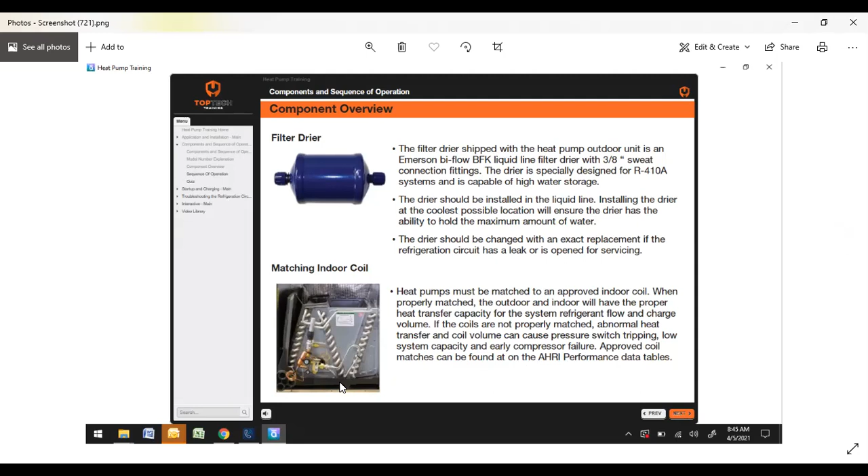Diagnosing plugged liquid lines is pretty simple. Put your pipe clamp on each side of the dryer as you're checking while it's running. Check each side, let it stabilize. If you start getting a temperature difference higher than 2 degrees, you probably have a restriction in there. I've seen them as high as 9 degrees before. So if it's that high, you know you're creating a restriction right there.

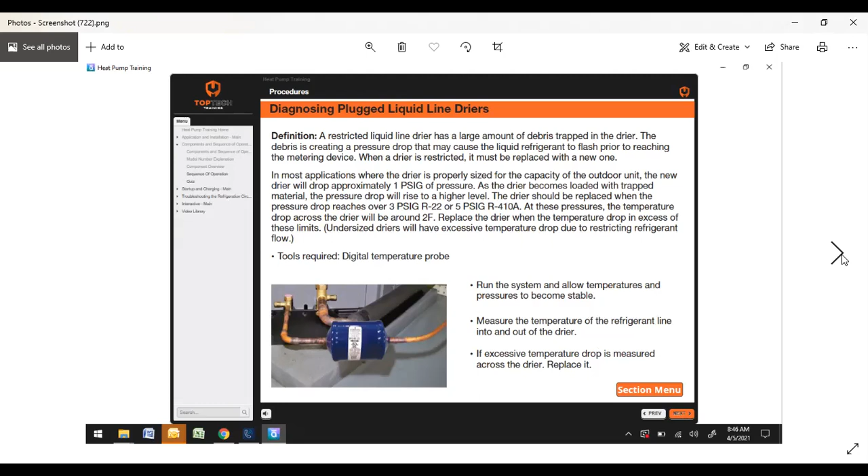Now you can actually measure the heating capacity of an outdoor unit. Pretty straightforward - you don't need any electrical backup. The formula to calculate this is your heating BTU output equals your indoor air CFM times your sensible heat constant...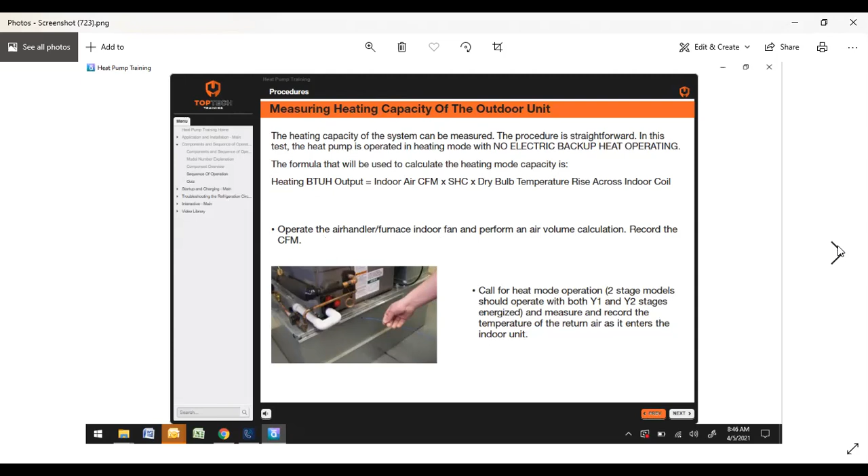So the process for this is operate the air handler furnace, indoor fan, and perform an air volume calculation. Record the CFM. Measure the temperature of the supply air at the supply plenum. When the supply air temperature stabilizes, record the temperature of the supply air, subtract the return air temperature from the supply air to determine the dry bulb temperature rise. Then determine your sensible heat constant. In our case here, we're about sea level, so 1.08.

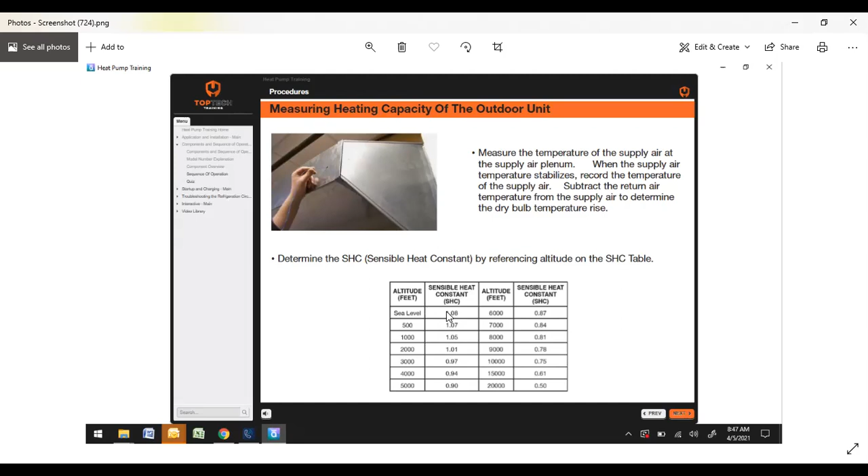So if you apply that: we're going to do an indoor CFM of 1,000 CFM, sensible heat constant 1.08, return air 70, supply air 95, temperature rise of 25. If we calculate that out, this system's operating at 27,000 BTUs. So if we have a 36,000 BTU unit, this will be underperforming quite a bit.

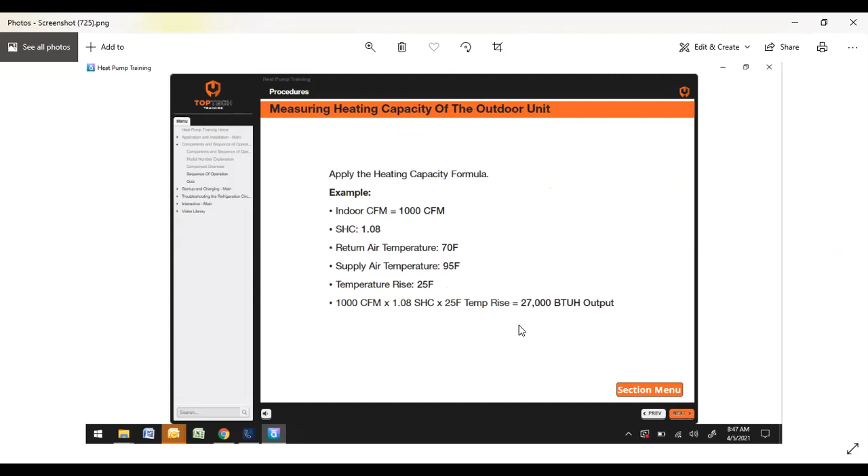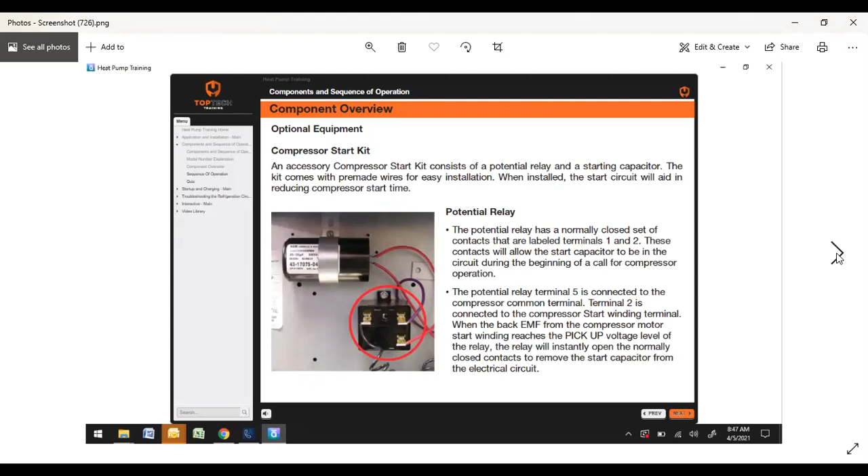And then some optional equipment. Some units come with compressor start kits, which will give you a potential relay as well as a hard start capacitor. Some other options are your crankcase heaters - some will come with them, some are optional.

And then all heaters should be placed down here towards the bottom. Its purpose is to drive refrigerant from the compressor shell during long off cycles. This is kind of a big one too - on initial startup, if you're dealing with a unit that's really cold, or installing it in a really cold system, or it's been off for a period of time, you want to energize your crankcase heater to get all that liquid pulled off your compressor. The inverter units won't even turn on until your crankcase has reached a certain temperature - so it's got that built into it.

And on startup, airflow is important. Static pressure readings will kind of tell you where you're at. Air noise will tell you where you're at. The new heat pump systems - they used to say 400, 450 CFM per ton. Each ton of cooling requires between, and it can actually be lower than that even, 375 up to 450 CFM per minute. So depending on what your system is - two-stage, single-stage, inverter - that all varies dramatically.

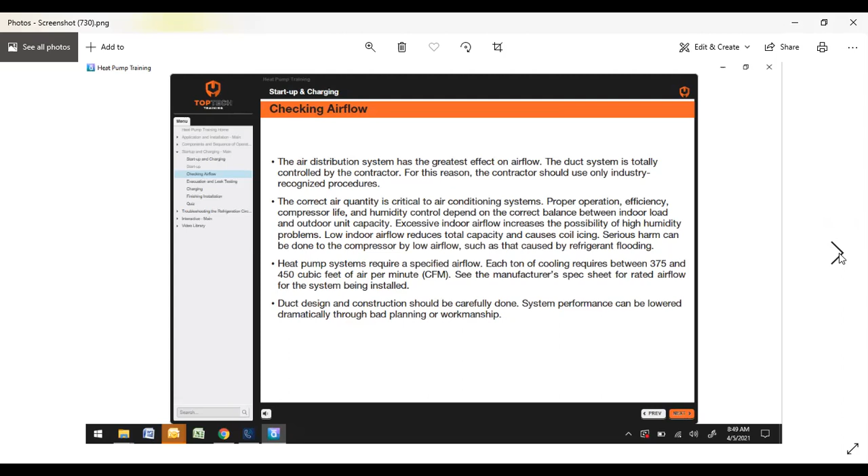So your duct design and construction, if you're laying it out, should be carefully done. System performance can be lowered dramatically through bad planning or workmanship. We've all seen those systems out there, just butcher jobs. Doesn't matter how expensive the house is or how nice the system is, it's not going to work.

So air supply diffusers should be selected and located carefully. They must be sized and positioned to deliver treated air along the perimeter of the space. If they are too small, they will become noisy. If they are not located properly, they will cause drafts. Return air grills must be properly sized to carry air back to the blower. If they are too small, they will cause a noise like a whistle or a hum.

Some of the new houses I still see it today, on the second floor, even the main floors, they'll stick the supply air vents right smack in the middle of the rooms. No supplies on the outer perimeters. And these are brand new custom homes. They'll stick one massive return air upstairs, and it's supposed to do the whole house. So that's something to pay attention to if you're installing a system.

There's also an easy way to figure out your airflow. If you're doing electric resistance heaters, you can take the volts to the unit times the amps of the element consumption, times 3.413, divided by your sensible heat constant, 1.08, times your temperature rise. That will give you your CFM for electric.

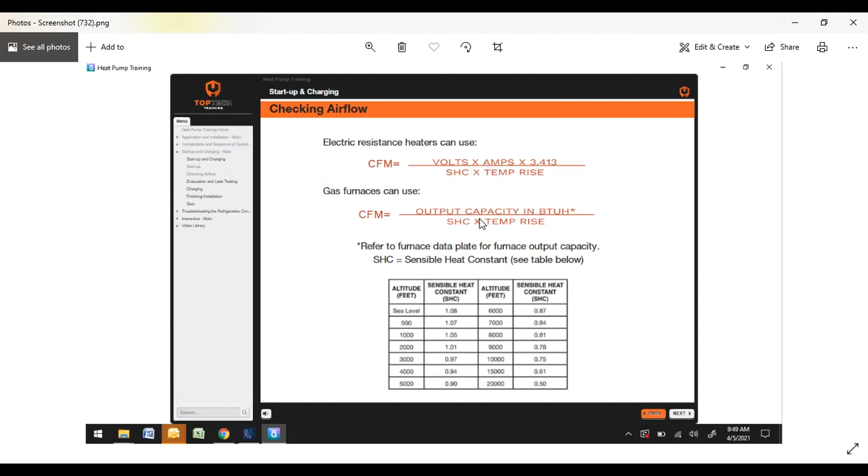For gas, it's a little bit easier. You take your output capacity in BTUs, not your inputs, your output, divide that by your sensible heat constant, 1.08, times your temperature rise. That's something you can do quickly to determine your exact airflow.

So we'll get into what I consider some of the most important parts, your evacuation and leak testing. Evacuation is one of the most important steps of the entire service procedure. A good pump, good oil, clean oil. Don't change it at the beginning of the season and put your pump away.

I used to change my oil. My oil, as a service guy, depending on what I did, I would change it even 2 or 3 times a week. Fresh oil will increase your vacuum and also speed up your vacuum.

Air and nitrogen in the system will cause high condensing temperatures and pressures. You can also see that on your gauges, they'll violently flutter, they'll vibrate. Moisture also chemically reacts with the refrigerant and oil to form corrosive hydrofluoric acid, and that attacks your motor windings and parts, causing breakdown. That doesn't happen on startup, doesn't happen in 6 months, 2 years, 3 years. That'll happen 4, 5, 6, 7 years later. It'll start eating your compressor up.

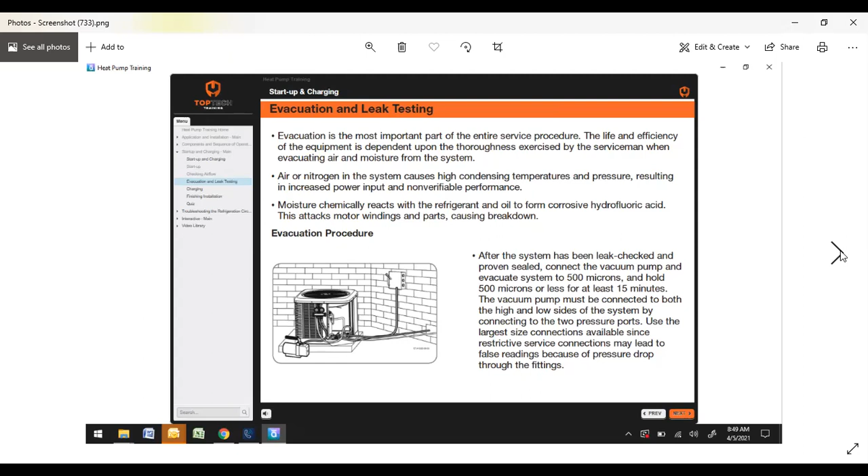I got to the point where I started doing that on every service call years ago. It may take me an extra 15, 20 minutes, whatever, but I guarantee you don't have to go back to that system. If you rush through, you start getting callbacks. Every callback costs the company more, free labor, and then also you got upset customers.

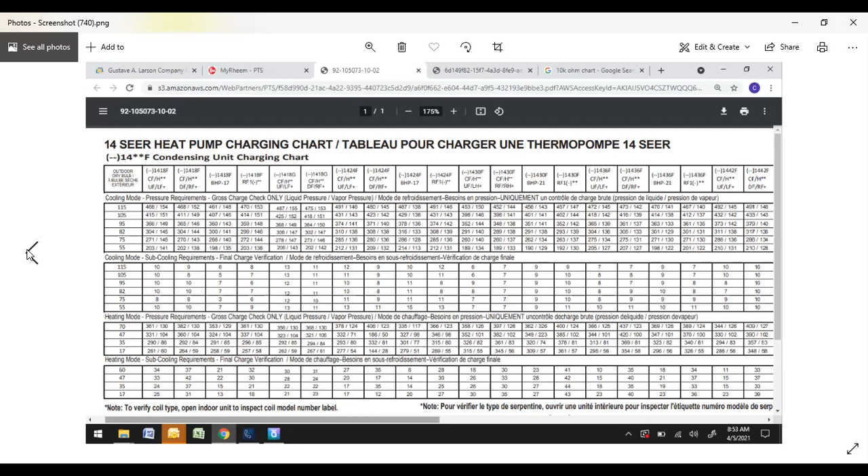In that case there's really no difference. But when you're dealing with heat pumps, it's important to know exactly what's your tonnage and your orientation. And then also, if you're going to do a two-stage model, a 16, any two-stage unit,

You have to make sure you are in the second stage when you're testing it. And they tell you to run for at least 15 minutes. If you're doing a two-stage unit, I would say no less than 30 minutes, to give it plenty of time to stabilize. If you charge it in low stage, it's going to be wildly incorrect on second stage. If you start making adjustments too quickly on second stage, it's going to be wildly incorrect as well.

So always reference the charging chart attached to the heat pump electrical panel. Find the indoor coil or air handler and orientation that you're working with. Find the intersecting point between the indoor coil and the outdoor temperature. Approximate any difference in the air temperature if it doesn't fall directly in line.

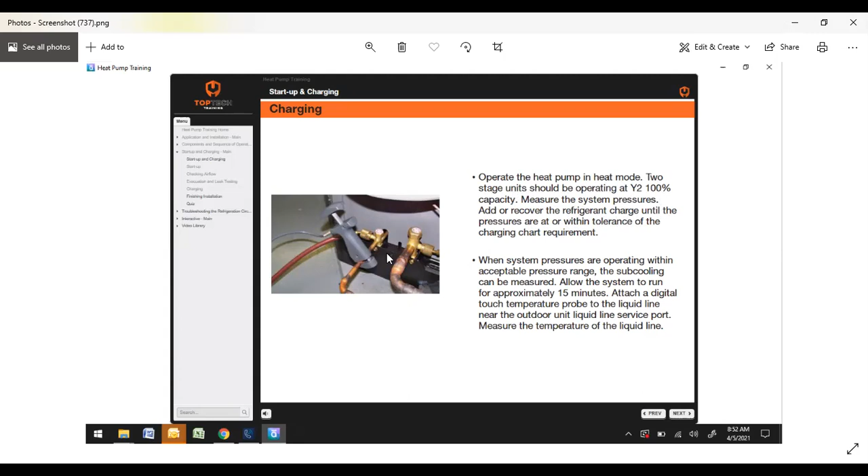So as far as your hookup goes, this is going to be your subcooling hookup for both cooling and heating. Always operate the heat pump in stage 2. Measure the system pressures. Add or recover refrigerant charge until the pressures are at or within tolerance of the charging chart. Like I say again, don't hold the gross pressures to be the gospel or the exact. What you're wanting to do is charge it directly to your subcooling. So you're going to have your high side gauge hooked up to your liquid line and use your pipe clamp to check your subcooling.

So measure the liquid line pressure, convert the liquid line to saturation. Subtract the measured liquid line temperature from the saturation temperature. The difference is your liquid subcooling. Compare the measured subcooling against the charging chart. To raise the subcooling level, you add a small amount of refrigerant. Allow the system to run for a few minutes, 15 minutes. Recheck the liquid subcooling level.

If your subcooling is out of sight, too high, you want to recover refrigerant and then allow the system to operate and stabilize before you recheck it again. If you jump the gun and start adding or subtracting too much, and I've done it before myself, you'll end up wildly off base.

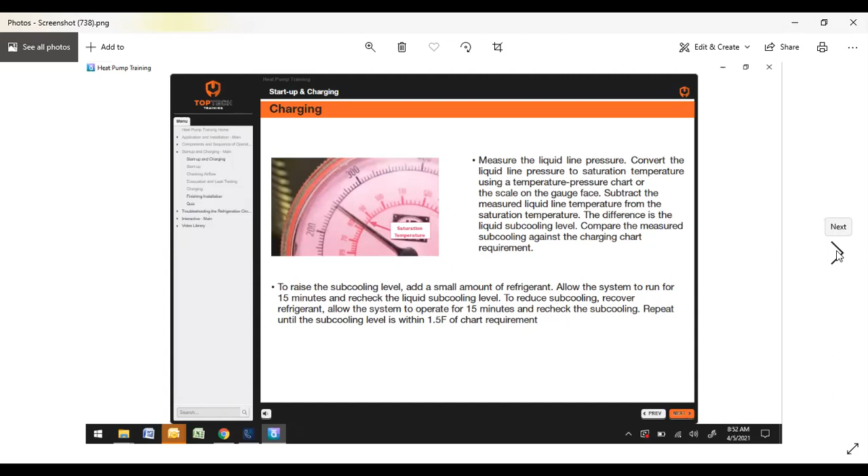Charging in cooling mode should be done around minimum 55 degrees, preferably above that.

Once your system pressures are within tolerance, and you make your final adjustment to the liquid subcooling, the system must have the following present conditions before attempting to charge. You have to make sure your air volume is in range, indoor air temperature. Well, they're saying 80 degrees, but rarely will we be at 80 degrees. The indoor and outdoor coils must be matched. Coils and return air filters should be clean, and line sets should be within allowable specs.

Anytime you're going to charge a unit, service call, especially a service call, startup, you're typically clean. Check that indoor coil, check that indoor filter, check the outdoor coil. If any one of those are dirty, it's going to completely skew whatever your charge is. And you can make it look pretty good sometimes by too much refrigerant or not enough refrigerant. But it's important to notice those.

So once you finish your installation on a service call as well, disconnect your pressure gauges from your ports. I'll usually take my finger, make sure I'm not hissing out anything of the Schrader ports. Put your caps on. You don't need to over tighten them. Replace the service valve caps. Make sure they're tightened as well. Replace your control box panel.

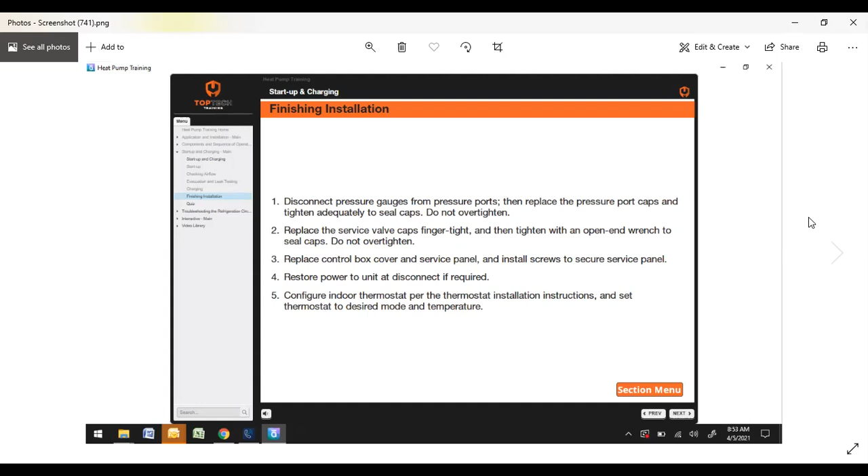As a rule, installation or service, if we're running the unit, I want to turn it off, allow it to cycle off, and then turn it back on. So I know that it's shutting off as it should before I leave, and then I also know it's kicking back on before I leave. So that way you don't get the call back that it's not working now.

Okay, so we're it's almost 6 tonight. So does anybody have any questions this evening?